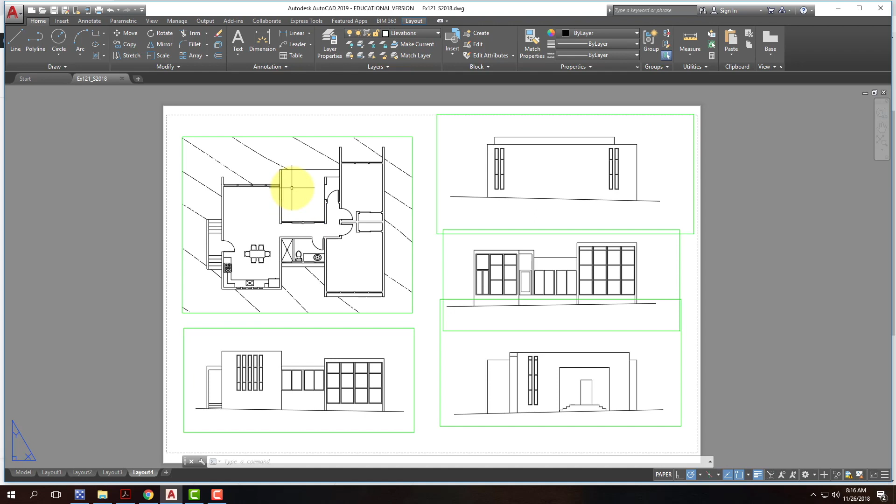And when I'm done with this, I'm going to go ahead and export it. I'm going to do that by going to the print icon, and I'll click on plot. We're going to continue to plot a single sheet. My guess is you already did this, but I'm just going back a few steps and reviewing here. The plotter should be DWG to PDF, which we set up originally when we did the layout. And so all I have to do is say OK. When that happens, I'm going to choose where to save it. And let me get into my flash drive here.

And let me create a folder for today. There we go. And let me call this... there we go. And I'll go ahead and click on Save. And when I'm done, that will open up in Acrobat so that I can see a quick preview of my drawing. OK, yeah, it showed up. That's good. We can go ahead and close that for now.

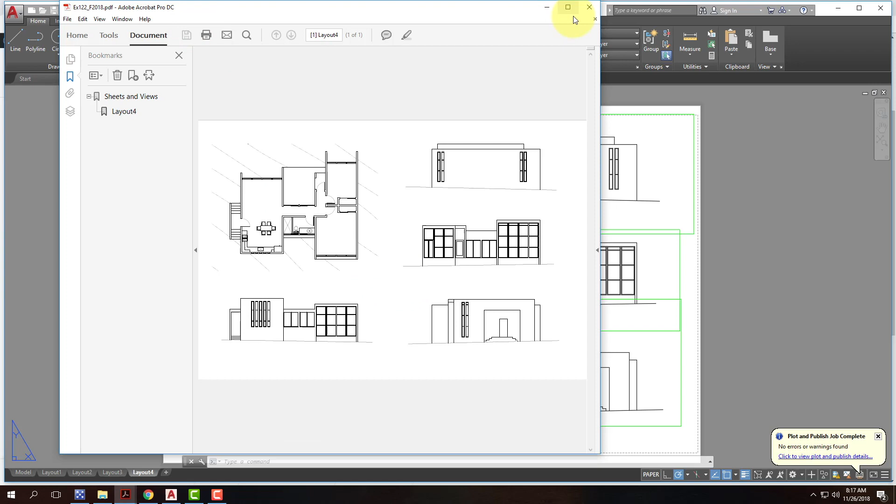And I'm going to minimize AutoCAD. I'll minimize Chrome here as well. And now that I have that created as a PDF, I'm going to go find it in my flash drive. So this was in exercise 122. And there it is. And instead of just double-clicking on it, which would open Acrobat, I'm going to right-click on this file. And I'm going to go to Open With.

And of course, these computers don't show Illustrator as one of the options. So I'm going to go ahead and say choose another app, more apps, and there's Adobe Illustrator. Why you would want to open this in Word, I have no idea. But we're going to pick Adobe Illustrator as our choice, and I'll go ahead and say OK.

And that's one of the neat things about a PDF file. It is an Adobe file, but Illustrator can read it natively. So we can just work, instead of on an Adobe Illustrator .ai file, we can work straight on the PDF. And the other thing about this is that AutoCAD, when it creates it, actually builds it as a bunch of live lines that we can actually select and work with. So it's not just a flat image file. It's something that we can really work with.

Let me press Control-0 so I can see the whole screen here. There it is. And we can see that most of my lines came through. Most of my line weights came through well. So I'm reasonably happy. Before I get too far into it, though, I do want to take some time and double-check line weights and make corrections as necessary.

So a couple things. When I first look at this Illustrator file, if I go to click on any one of the objects here, they're contained within the same invisible viewports that were set up in AutoCAD. That's not necessarily a bad thing. However, Illustrator likes to see the layers a little bit differently. So I'm going to come over here to my Layers tab. I'm going to expand Layer 1, and you're going to see that I have 5 clip groups showing. Each of these clip groups corresponds to one of the viewports.

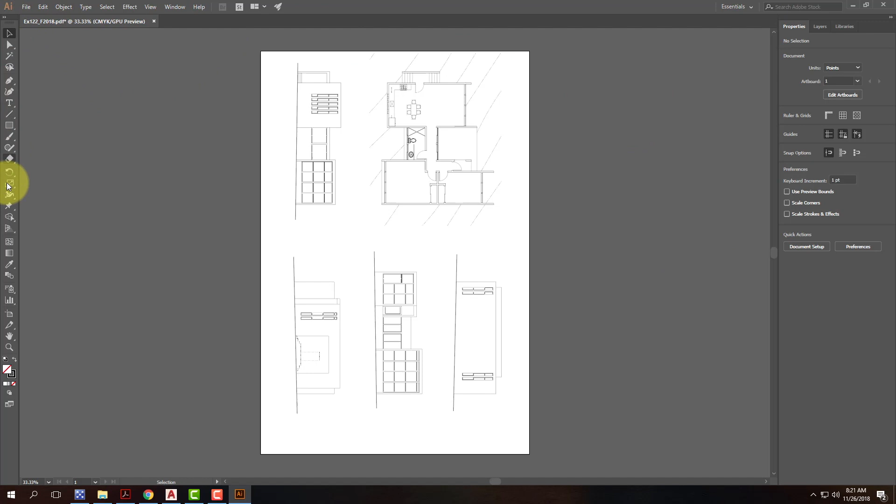OK, so for some of you, it came in like this. And so I just wanted to correct that in case it does come in like this. Mine didn't, but if it does, you're going to use something called the Artboard Tool. Come down on the left side here. It's almost to the bottom. It looks like a page with a little cursor in the upper left corner.

When I click on that, we see that I have Artboard 1 showing. When Artboard 1 is showing, if I go to the Properties tab over here, I can switch from my portrait into my landscape orientation. That's essentially switching the page size. Once I'm done with that, I can go to my black arrow and select all of my lines.

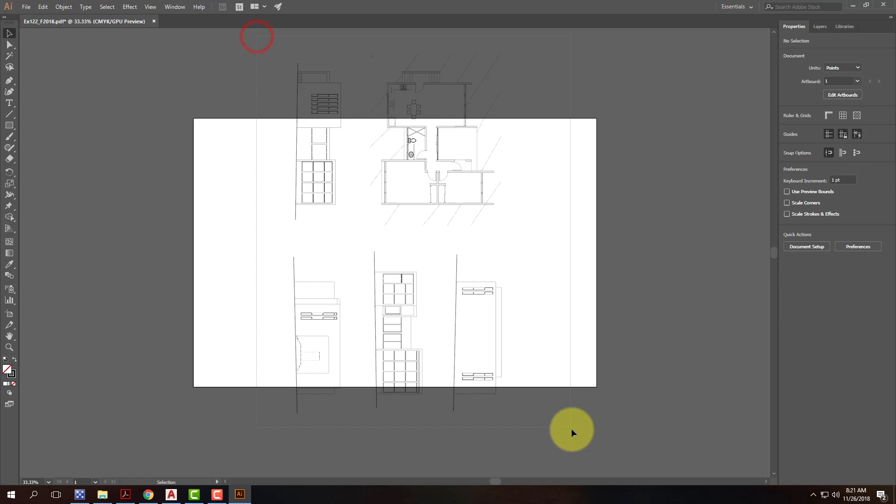I can do that by dragging a box around them or also pressing Control-A to select all. Then I'll move to one of the corners, and I'll get an arrow with an arc on it and two sides. That will allow me to rotate my drawings. If I hold down Shift while I rotate, it will jump to 90 degrees, and now I'm oriented in this direction. Hopefully it won't be an issue, but I wanted to at least bring that up just in case it

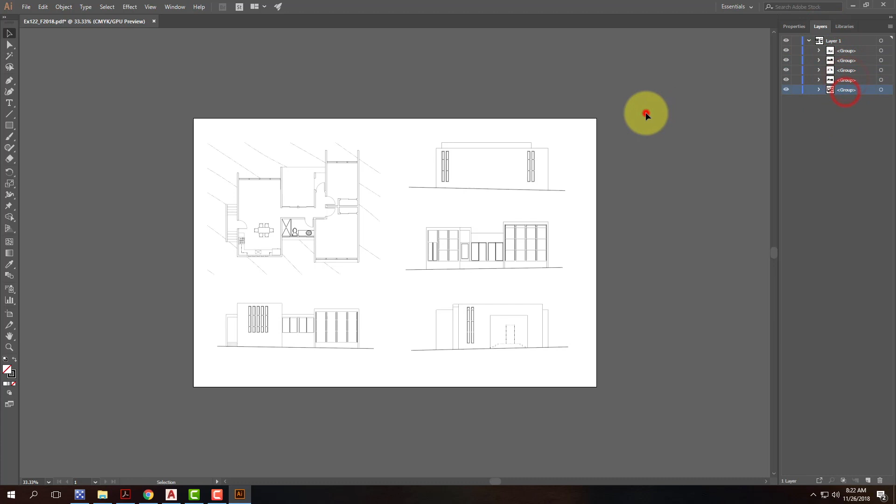presents itself for you. OK, so now that I have my orientation correct, I also have my layers correct so that they're in groups, I can start to really work with any one of these drawings. Let's look at the plan first. So I did Control+ to zoom in a little bit here. And if I wanted to edit something on the plan, for example, I could double-click to get into the group. And so this is called Group Isolation Mode.

And when I do that, I get this gray bar that appears at the top, which is getting me inside of the group, which doesn't allow me to work with the other objects. So I'm isolating just this one group. And I can then go in and make adjustments. So if I took this path, for example, and I went to Properties, and I said, you know what, I want that to be a little bit thicker, there it is at 2 point, and that looks a little bit better.

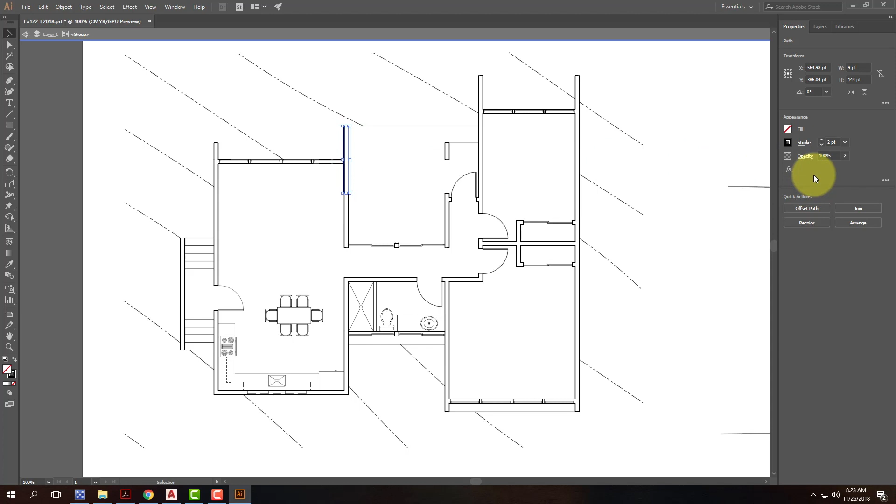In which case I might go back and select the rest of the lines, etc. It's a lot of work to go through and select them, which is why I would encourage you to do it in AutoCAD, not in Illustrator. But I like to point out that it is something that you can do if you feel the need to make that adjustment. So I'm just going to undo it for a second, like that. One more. Nope. There we go.

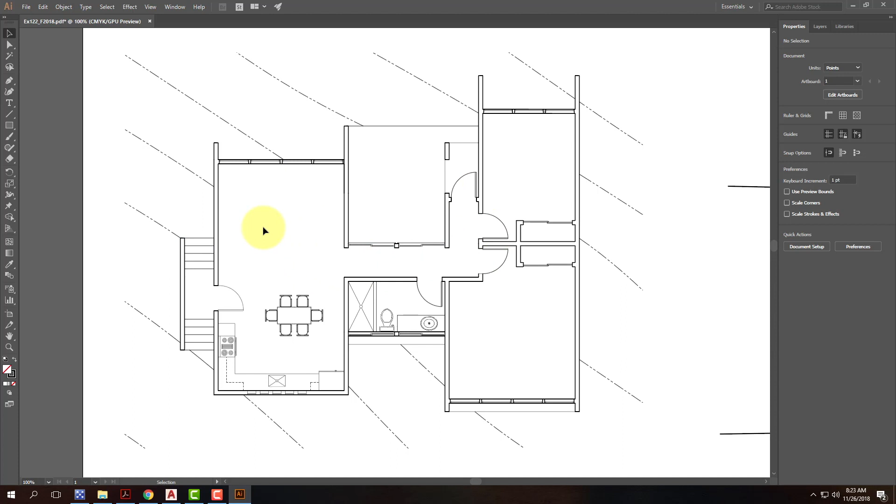But there are some times where you just need to make a couple little adjustments, and you can do that in Illustrator. Sometimes you might need to go into one of the elevations and thicken up that baseline. That might be a desired result. If that was the case, we could up the baseline a little bit. So there it is at 5 points, much thicker. Obviously, I'd want to make sure that each of these correspond.

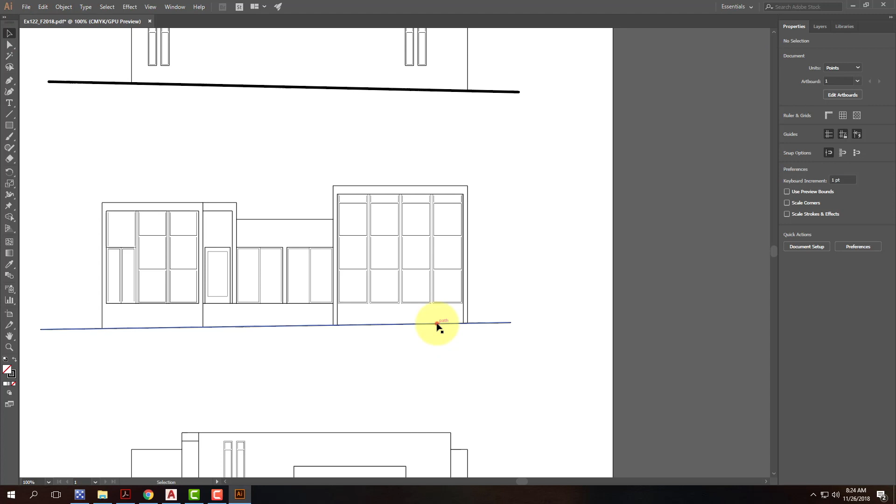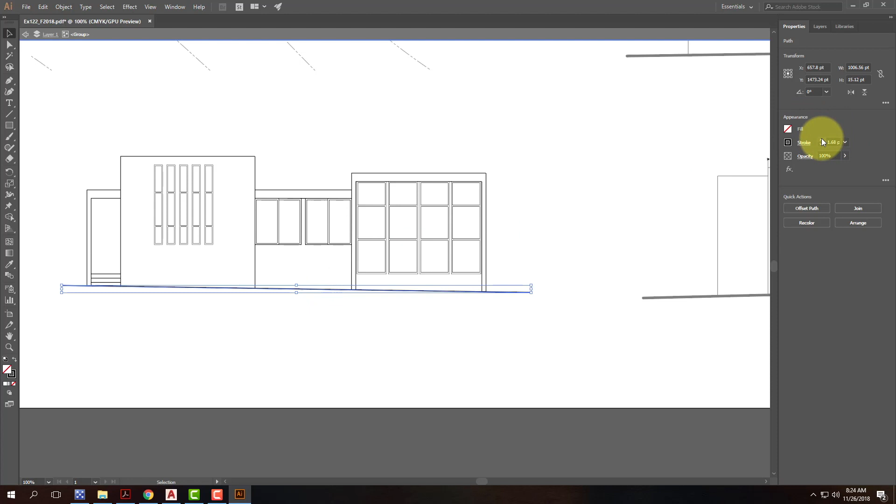To get out of the group isolation mode, I come up to this little back arrow and step my way back out, and then double-click to get in. This one was also at 5. I'll step my way out, come down to this one. Step my way out, and end with this one, and back out.

So that's the advantage of keeping them as groups, is that you can go into each in isolation mode and kind of focus on a particular piece. And maybe I decide that those lines are too bold now. It's just something that you can make adjustments to after the fact. I think it's easier to do it in AutoCAD, but at least you're aware that that can be done.

OK, so now I have this where I'm looking at it, and I'd like to further enhance the drawing. So we had worked in AutoCAD to do some hatching. It worked sometimes. Sometimes we wanted to fill in the walls of the plan, for example. We can do that in Illustrator as easily as we can do it in AutoCAD. It's just a little bit different in terms of the process. I showed you how to do it in AutoCAD. I want to show you how to do it in Illustrator as well.

So before I work on any of this, however, I always like to make a duplicate of the layers just in case I make a mistake. And so it's always a good idea to have that backup layer. And so here under Layer 1, with it selected, I'm going to go to the little flyout menu, and I'm going to say Duplicate Layer 1. And there it is. I have Layer 1 copy, and I have Layer 1.

You could call one of these Backup. I could say this is Backup, just in case. I'm going to put that down at the bottom of the layer stack, and I'll go ahead and turn it off because I don't need it.

Now that I have a backup, so I can go back to, I want to fill in some of this plan. So let me click on it, and I'll double click to get into my layer isolation mode so that I can work directly on this.

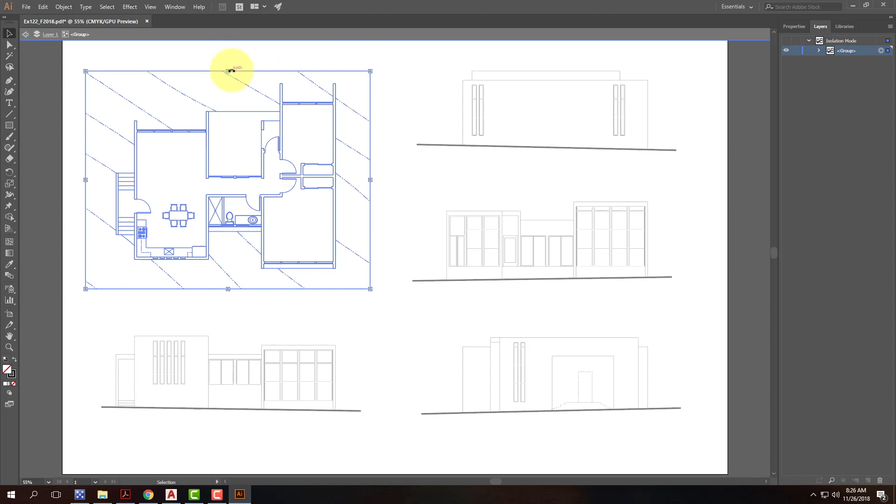And from there, I can use the Live Paint tool, which is available underneath the Shape Builder tool, or you can press K on the keyboard to get to it. It's called the Live Paint bucket. And this is going to allow me to fill in certain regions.

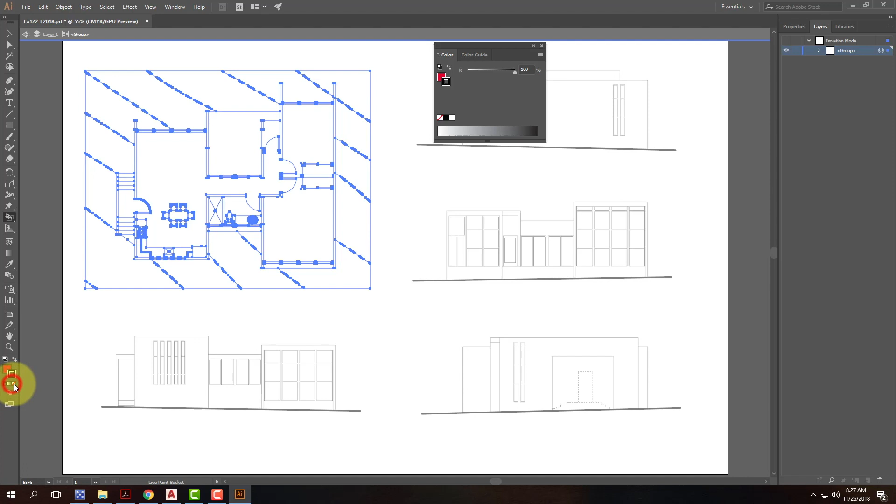So first thing I need to do is make sure that I have a color to fill in with. And I usually pick a bright color, something like a red. Yeah, or a blue or whatever. Doesn't matter what the color is, but this is going to help later on with the selection process.

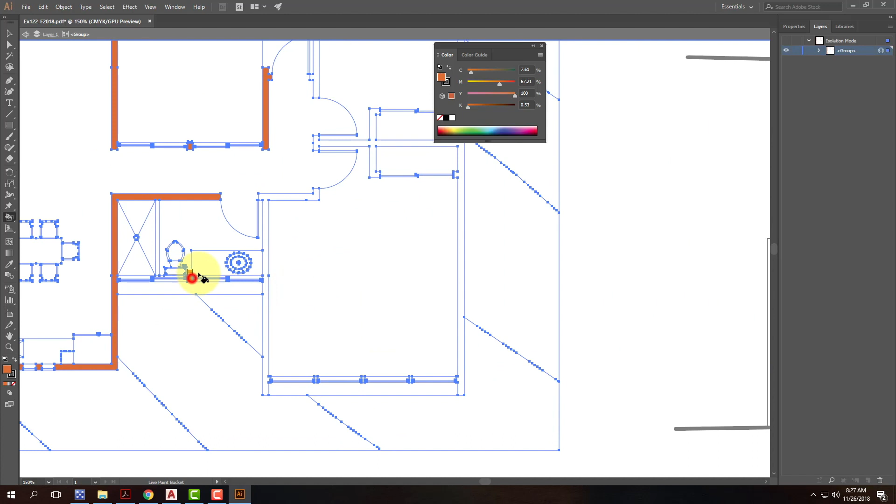So let me zoom in just a little bit, and I'm going to fill in every one of the walls with this color. So this is kind of like doing a hatch in AutoCAD, where we're going through and we're making little selections. And now I've selected all of those.

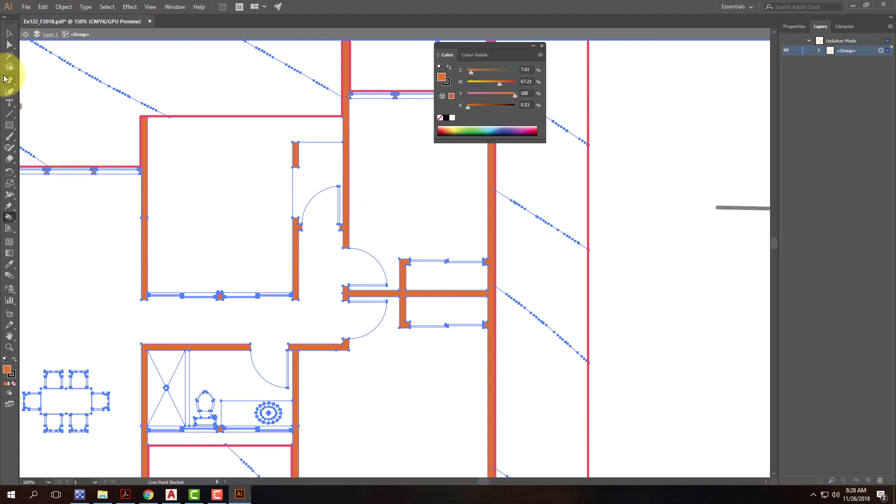Now it's entirely possible I might want to work with the floors as well. If that's the case, I'll change my color to something else, and I can fill in where the floors would be. Like that. That works. And I'm not going to worry about any of the other fill regions for right now. So I filled those in.

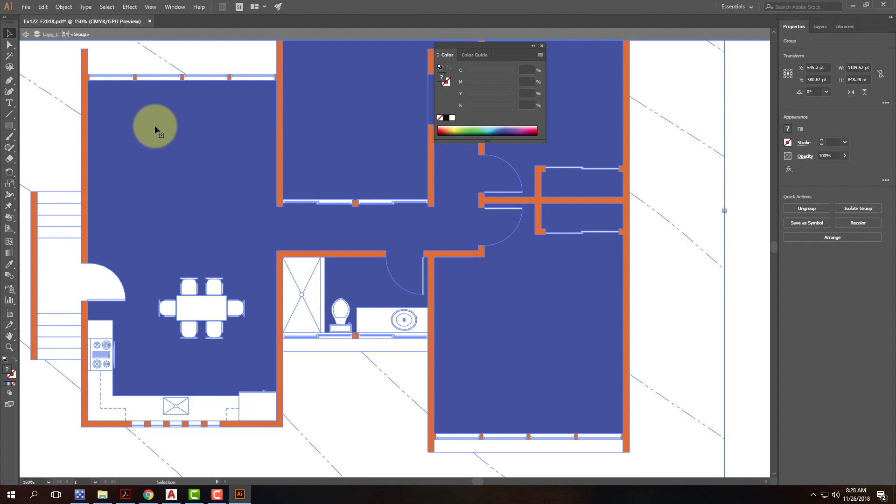When I'm done, I'm going to come over here to the properties, and I'm going to come down and choose, where'd it go? OK, well, I'm not going to worry about that for right now. Let me go ahead and back out. I'm going to use my direct select arrow right here to select just one of the colors. So we'll pick this object here, I hope. Let me back all the way out for just a second.

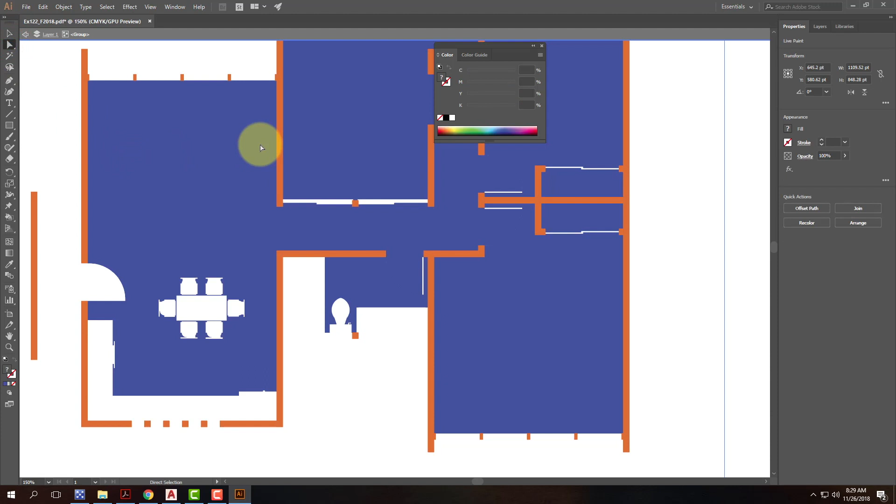All right, I have to expand the live paint group, but somehow it's not letting me expand the group. Hold on a second. OK, so there used to be a button that says expand. It's not there. So with my live paint group selected, which it still is, I'm going to go up to the Object menu. I'm going to go to Live Paint, and then I'm going to click Expand. I wish the button was still there. I don't know what happened to it.

Once I've done that, I can use the direct selection tool, the white arrow, to select any one of these filled in regions. So let me select the orange filled in region for my walls. And I'm going to select this one, but I want all of them selected. So using the Select menu, I can go up to Select and then Same Fill Color, which is going to select all of the orange.

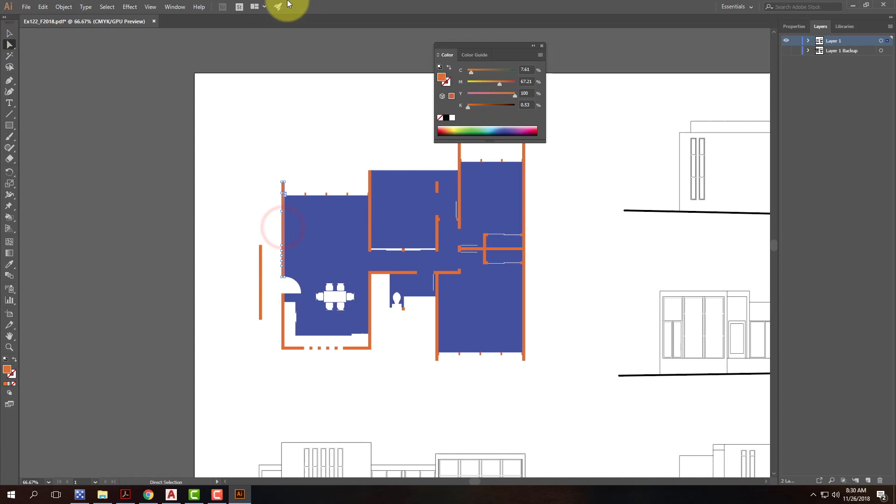I'm going to go to my layers, and I'm going to create a new layer, I hope. Let me back out of my groups for just a second. There we go. Let me select Same Fill Color. There it is. I'm going to create a new layer. I'm going to call this new layer walls. And I'm going to move all of these objects onto the walls layer.

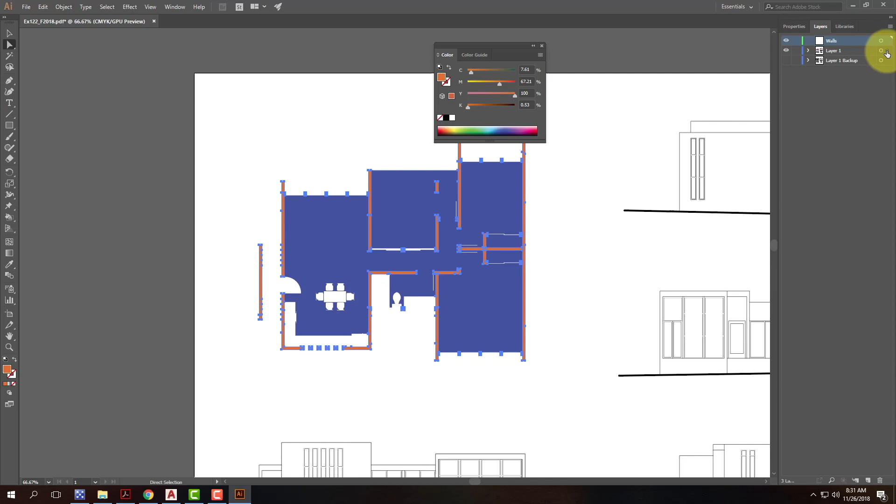So they're selected. To move the objects from one layer to another, I'm going to select this little box next to where it is in layer 1. And I'm going to drag that up onto the walls layer. And it's going to change all of the walls onto the walls layer. And then I'll go ahead and turn it off.

Next thing, I'll do the same thing with the blue floors. I'll select the floor. I'll go to Select, Same, and we're going to do Fill Color to get all of them. I'll create a new layer, and we'll call this floors. And I'll move these objects onto the floors layer. So I'll click and drag those up onto the floors layer. So now I have the walls and I have the floors each on a separate layer.

With them like that, I can go ahead and change, for example, the color of those. So with just those being highlighted, I could select them all. And I could come in here and I could say, you know what, I want them to be a certain percentage gray. So maybe I'd say I want them to be 30% gray. So it would be 0, 0, 0, and 30.

Gives me a nice light gray color. I can then turn on my layer backup, which is my original undisturbed. Let me move it on top of everything else. And we can see that I was able to change the fill color of those walls.

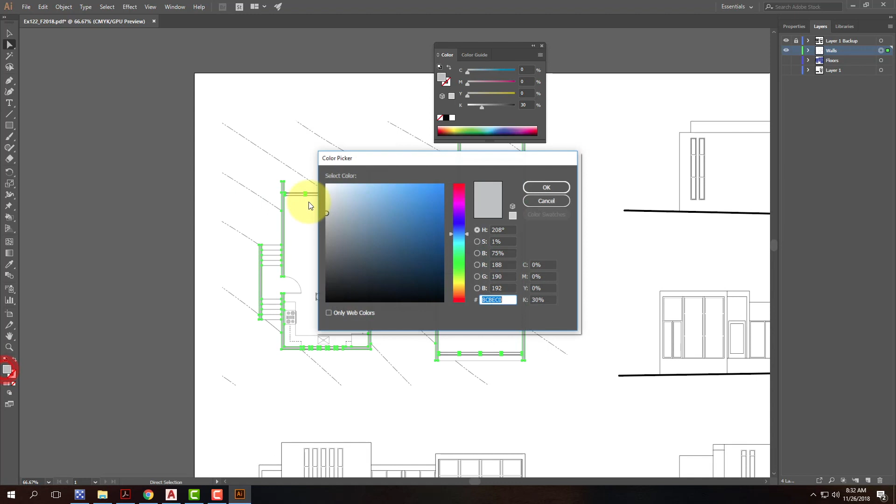If I didn't like them, we could come back and I could select those walls again. And I could say, you know what, I wanted them to be a little bit darker. So let's change that to 50% gray. And now those are just a little bit darker. So it's pretty easy to make those adjustments.

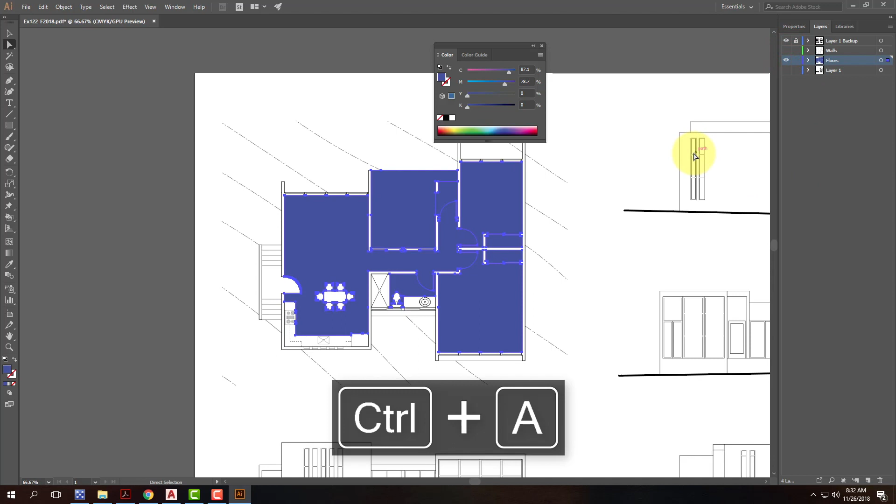The floors, if I were to turn the floors back on, I can do something similar, where I could take the floors and say select. Let me just turn off the walls. I'll select all the floors. And I could change them to be a much lighter gray. So maybe a 10% gray.

I could say 0, 0, 0, 10%. And they have just a little bit of gray to them. And maybe that helps distinguish what are floors and what are walls versus my line drawing. So it's subtle, but it helps the floor plan pop out just a little bit from its surrounding context. Sometimes you want a little bit more texture to these so that they're not quite so stark.

Computer graphics are always very sharp. Maybe you want to make it a little bit dirtier. I have a couple different options for you, one of which is available on the course website. If you go to your Resources tab, come down to Swatches, I have some sets based on Prismacolor markers. For those of you that have worked with inking markers and that sort of thing, these are designed to mimic what it would be like if you colored it in by hand.

If you download the architectural set, for example, this will match up with the architectural set of Prismacolor markers. The colors should be the same. We're not doing color matching on our printing, so it's not perfect, but they're pretty close. Once you've downloaded that, you'll want to expand it and save it on your flash drive. It's taking a little while to download. I already have it expanded on my flash drive, so I can go back over into Illustrator.

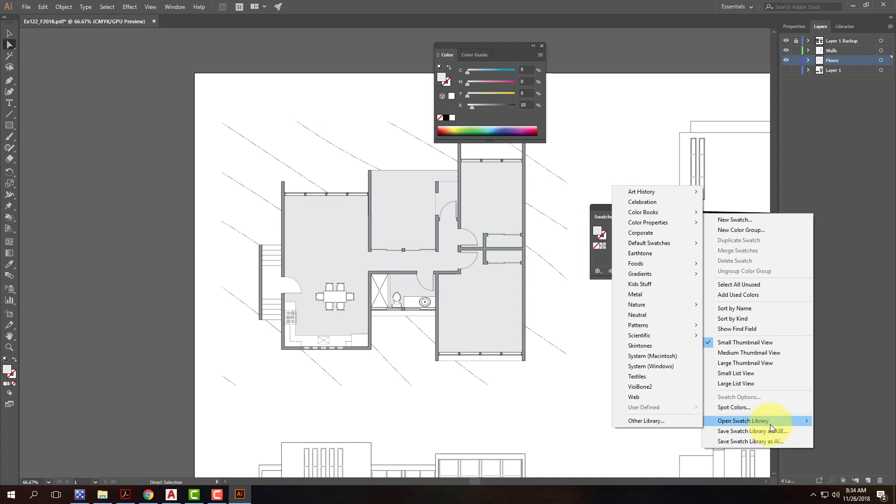And I'm going to open up the Swatches window. So I'm going to go to Window and then open Swatches right there. And with the Swatches window open, I'm going to click on the flyout menu, the 4 lines in the upper right corner, and say Open Swatch Library, Other Library. And I'll go find that architectural swatch library on my flash drive.

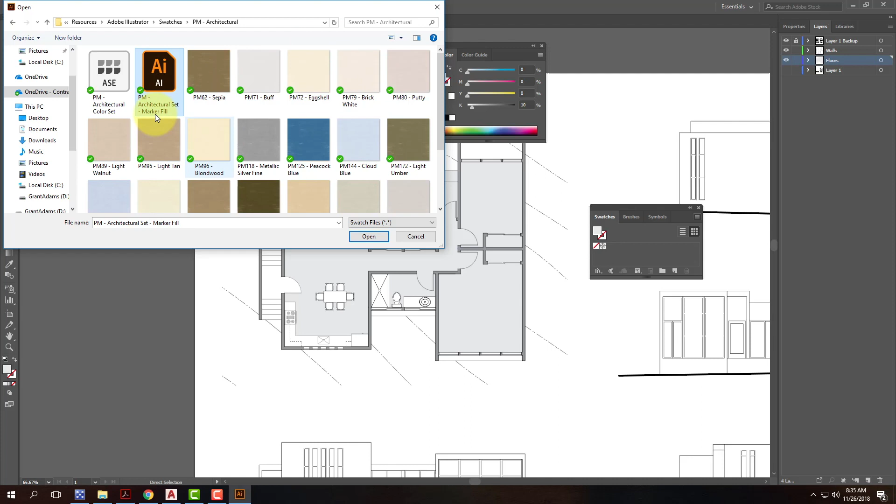So I have a folder for Resources, a folder for Adobe Illustrator, a folder for Swatches, and there's my Prismacolor architectural, and there's the architectural fills. The AI file here that I'm going to load, and I don't know if you guys can see this. Yeah, you can see a little bit on here. They have some streaks in them, as if you actually colored with the markers. So it's a little bit more casual than just the color itself. So I'm going to go ahead and open that.

And there they are. That's the architectural set of markers, or what Prismacolor deems the architectural set. And essentially what I can do then is I could select all of these objects. So let me go into Select, Same, Fill Color. And I could say, you know what, I want to apply one of the architectural swatches. Maybe something like that. It's the color, and it's also a little bit of a marker texture.

On the projector, you're not going to be able to see the marker texture as well as on your own individual screen. Sometimes if I pick one of the darker ones, you can see it a little bit better. I can see it on my screen. I wonder if you can see it there. No. I don't think you're going to be able to see it. Even if it was the black one, I don't think you can see it. So you'll have to try it out for yourself. And so you can play around with what the various color options are.

If you don't like the architectural marker set, there are a few others that you could download. Some of the sets that I really like are the warm grays or the French grays, which are just grays but with marker streak pattern to them. And so the same thing applies. I would go into my swatches, click the flyout menu, and I'd go into Open Swatch Library, Other Library.

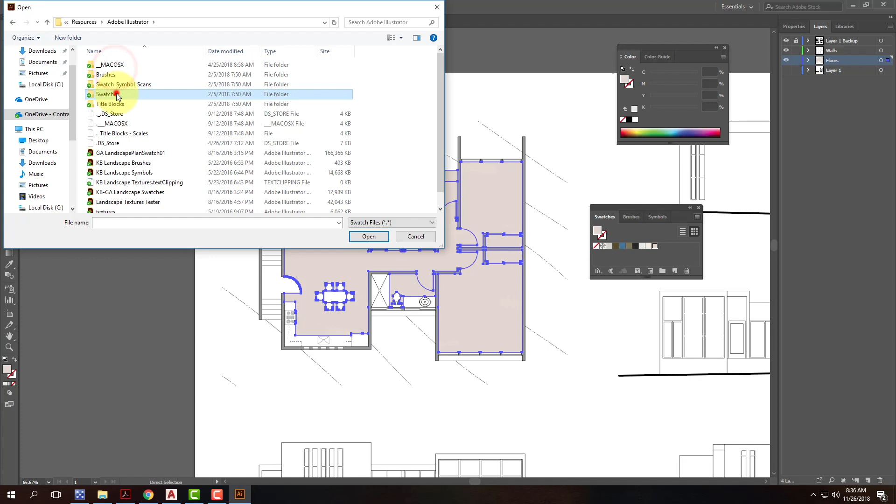And once again, I go into my Resources folder and into Swatches, and I could go to the warm grays. And there you go, there's the warm grays. I'll pull those out separately. Going from 10% all the way up, I think that's a 50% gray. You can get darker, etc., depending. So somewhere in here, yeah, probably like that. That's a warm gray, 20%, 30%.

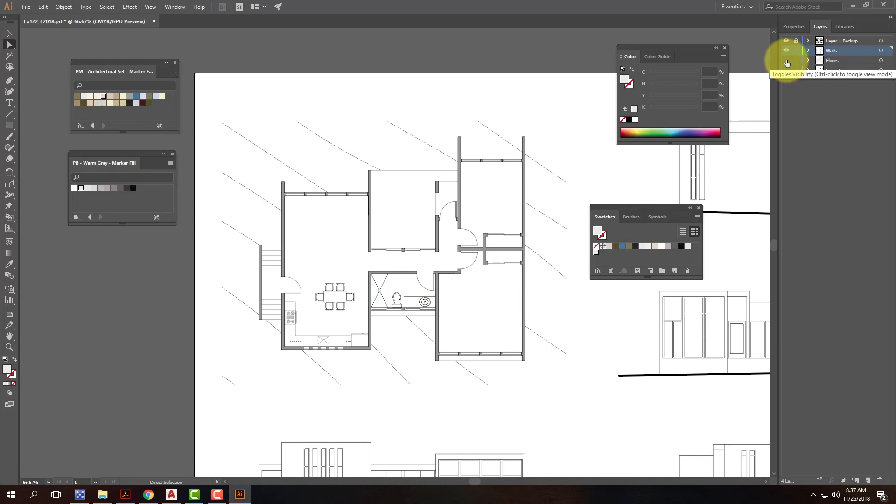Looks pretty good. I can do the same thing with my walls. I could use that same swatch pattern for the walls. So let me go into my walls layer. And with that selected, there they all are. I could come back in and pick a slightly darker for my walls, maybe a 50% gray, maybe 60%, something like that. And that would fill in those walls. And then we can turn back on the floors.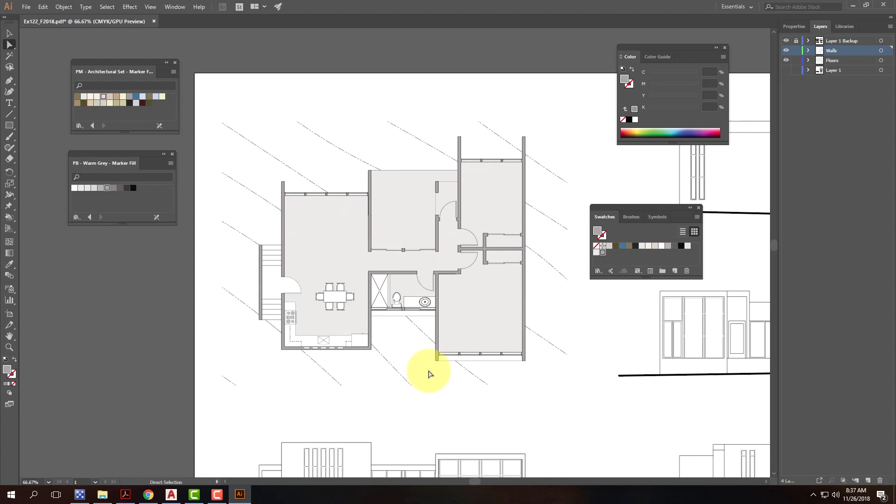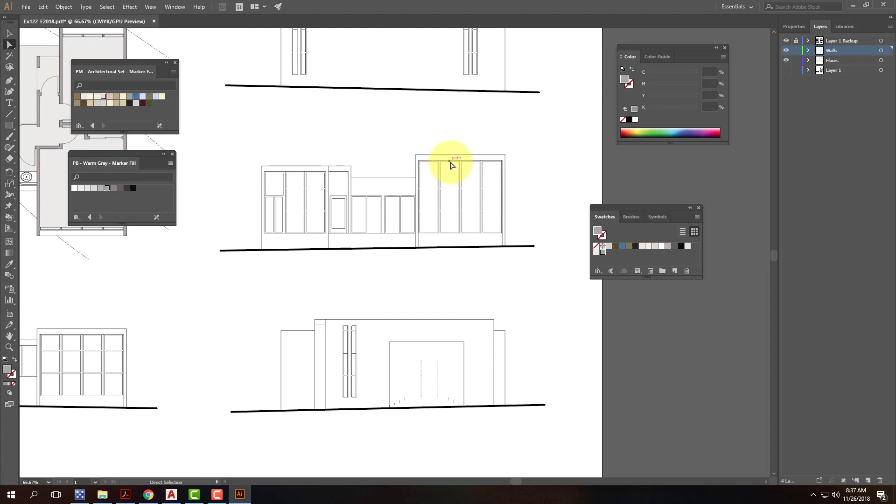So essentially what I'm doing is I'm doing a little bit of collage work after the fact in Illustrator to enhance my plan a bit. And in this case, I think it did a fairly successful job. Somehow I missed that region in my fill, but it's OK. So the next thing that we can do is I could identify what are windows on this particular elevation view, because I think that would help enhance this just a little bit. So I could do the same thing.

I'm going to turn off my layer backup. I'll turn off my walls. I'm going to turn on my original layer right here. And I'll get into this. There we go, this group. I'll double click to get inside, and I'm going to select it all. I'll go back up to Object, Live Paint, Make. I'm just going to make it that Live Paint group. Sorry, let me make these marker sets a little bit smaller there.

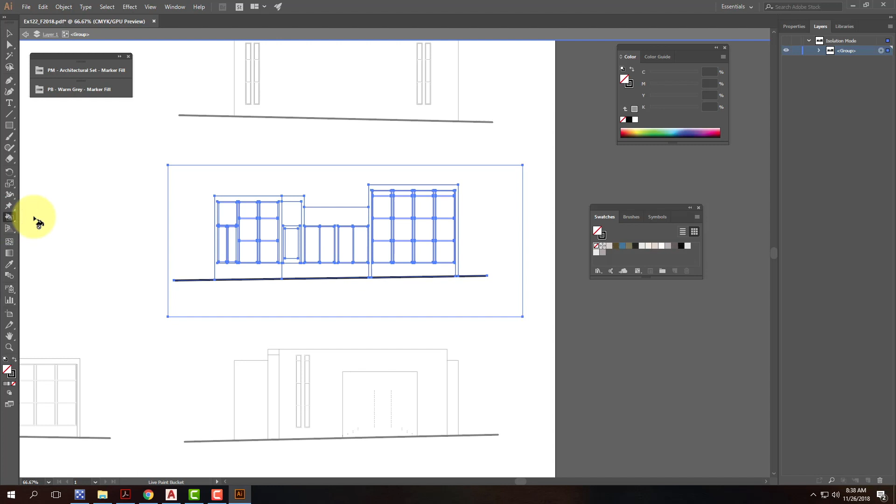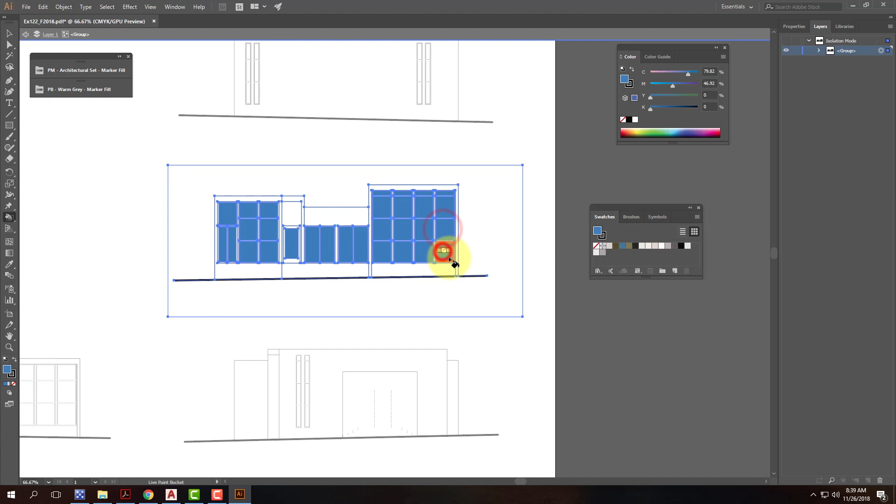Then I'll go to my Live Paint tool, which is right there. I could press K to get to it. And I'm going to go ahead and change my color. So let's make it kind of a blue color. And I'm going to fill in each of the places where there is some glass. OK, so now I have all of those filled in.

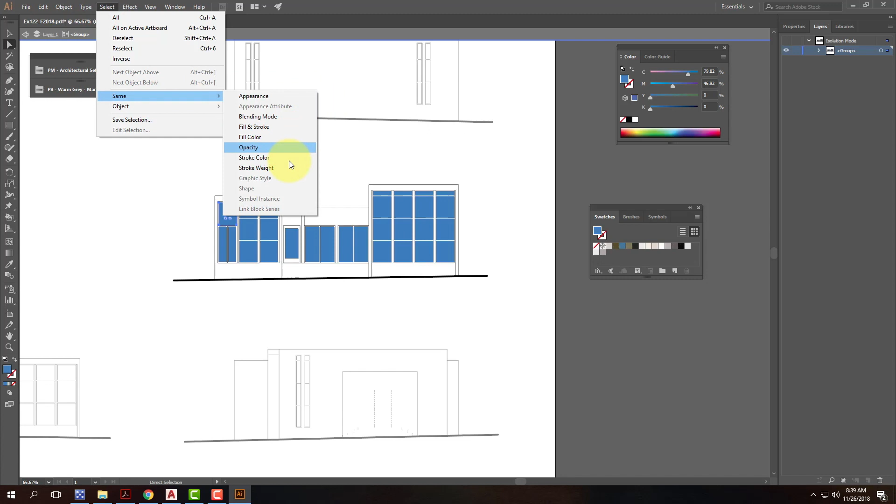When I'm done, I'll go up to Object, Live Paint, Expand. That breaks apart the Live Paint group and will also allow me to use the Direct Select tool, the white arrow, to select one of the glass panes. Then I can go up to Select, Same Fill Color to get all of them. And I need to get out of isolation mode, back out. There we go. One more time, let me select the first one. I'll go to Select, Same Fill Color.

I'll create a new layer, and we'll call this Windows. I'm going to call it Windows 1, because I may do it in multiple locations. And then I'll go ahead and put all of these objects on that Windows layer. So I'll click and drag the little square up onto the Windows 1 layer, and then we can turn off everything but the windows. So in this case, I could turn back on the line drawing, and all of my windows are at least shaded in blue.

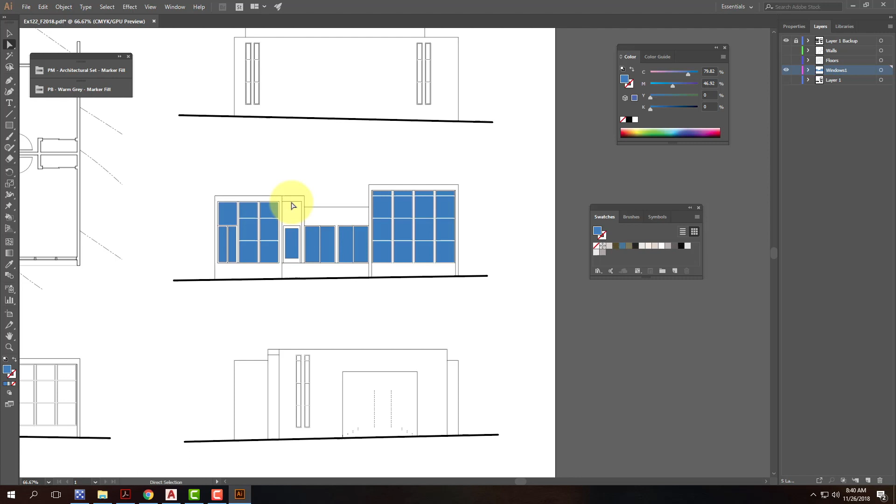Maybe that blue isn't quite the right blue. I could select one of them and go back to Select, Same Fill Color. And I could adjust the color of blue so that it's a much lighter shade of blue. Maybe like that. And maybe that looks a little bit better in terms of designating that as a set of windows. Sometimes, however, using some kind of a texture on the background makes it a little bit more realistic or easier to see. And in that context, I'm going to go find an image of some clouds.

I already have a cloudy sky. I've downloaded them. I've saved them on my flash drive, so I'm not going to download one of these specifically, but you could download any one of these and make it work. And so now I need to bring in that cloudy sky. So let me go ahead and go to File and then Place. And I'm going to find a cloudy sky.

It would be under Resources. It would be under Collage. It would be under Skies, Cloudy Skies, and there we go. And maybe this one. I'll go ahead and place it and drop it right there.

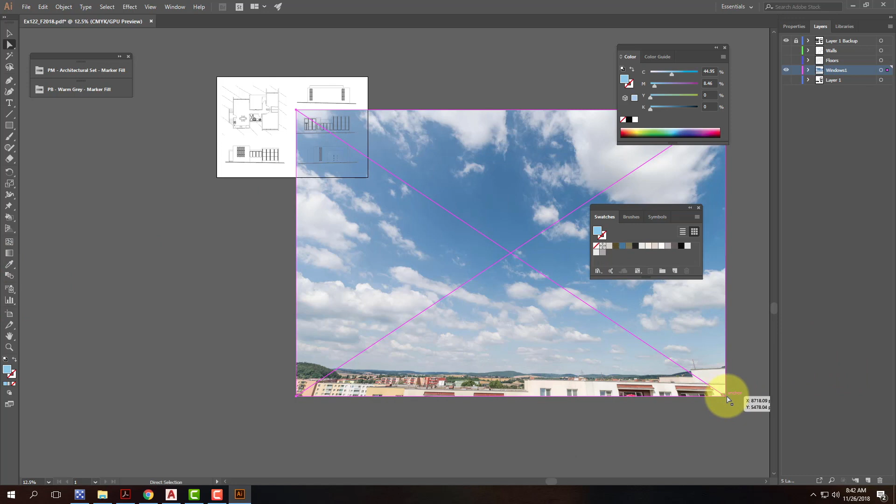It's way too big. Let's make that a little bit smaller. I'm going to hold down Shift. Let me use the regular black arrow here. Hold down Shift. Make that a little bit smaller. Something like that. Let me zoom in here.

OK, so now what I want to have happen is for all of the little shapes that were representative of my windows, I want for all of those to cut out this image. And this is something that used to be, I would say, the most important thing that I would teach during the semester. And tides have changed a little bit. Strategies have changed a little bit. Now we do a lot more Photoshop masking, which is what I emphasize.

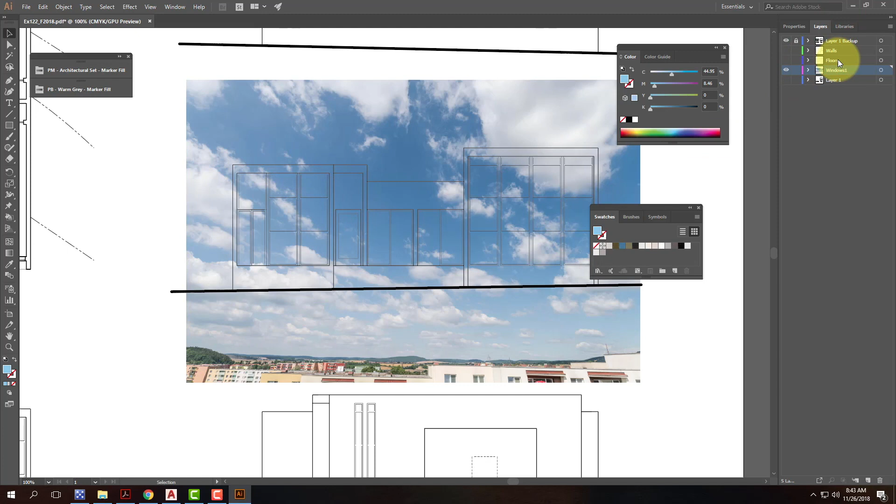OK, so let me look specifically. Let me turn off my background altogether. Let me look specifically just at this Windows 1 layer. So on this Windows 1 layer, I have the image, and I have all of the little squares that are in the background. Let me turn off the image for just a second, and let me look at all of these. So I have all of these together. They're in a group right now, but I want them all to become one object, not a bunch of individual little objects.

And I can do that by going up to the Object menu, and I can go to Compound Path. If I can find it, there it is, Make. And that will change all of these from individual little objects into one object. And there it is listed as a compound path instead of a group. That's good. I'm going to make sure that the compound path is on top of my image file. So the compound path is on top of the image file.

This, by the way, has to be in this order for it to work. And this is one of the stickier things in Illustrator, is it's very, very specific. You can't have more than one path. It has to be just one path, and it has to be a compound path if you have something that's complex like this. Once you have that, it has to be on top of the linked image file.

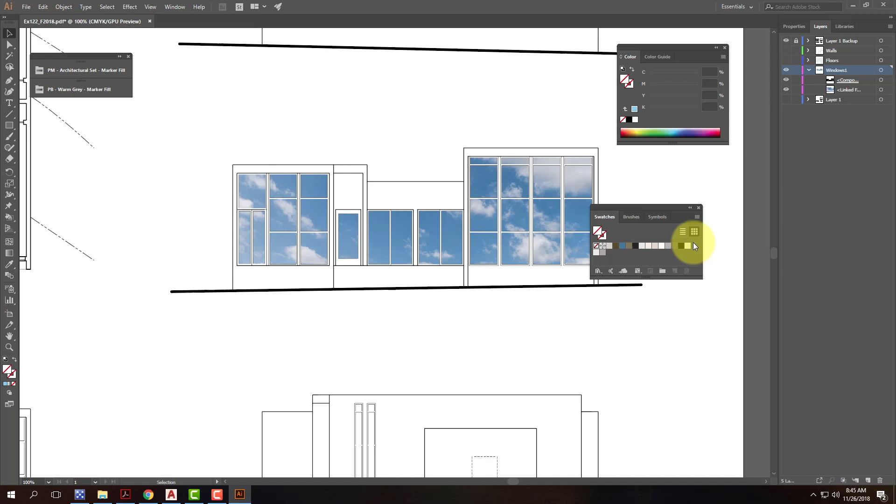Once this is the case, I'm going to select the main layer itself, the Windows 1 layer, and I'm going to come up to the flyout menu, and I'm going to say Make Clipping Mask. And when I do that, it's going to clip the image in the shape that I had selected there. So it's essentially clipped the image to show just the sky with the windows. At that point, I could turn back on my layer backup, and we'd see that the glass is represented by the sky, not by just the colored region, which can be a very successful way of representing the sky.

Sometimes this needs to be adjusted a little bit. Sometimes it's a little too dark. If I select it, go into Properties, I can change my opacity right here. We could drop it down so that it wasn't quite so dark. It's amazing the difference in seeing it on the screen projector versus on my screen. This is too light, but on the screen projector it looks reasonable. So it is what it is.

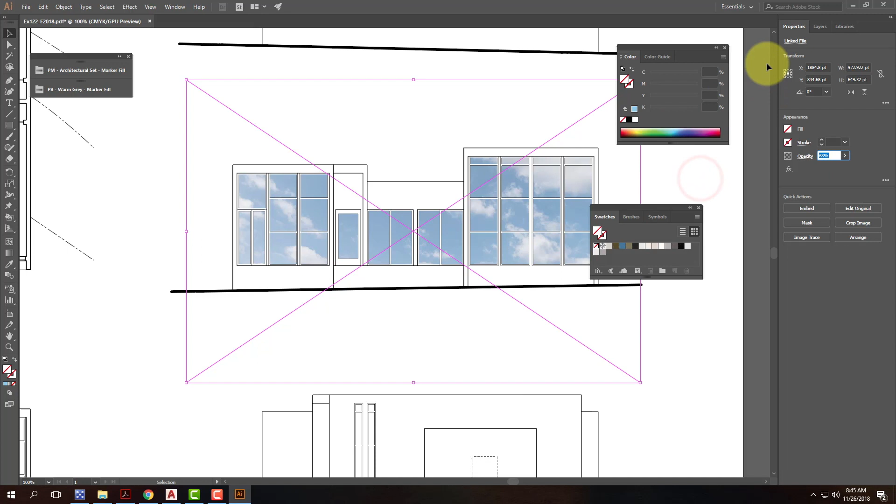So that's how to create these windows in your line drawing. I could do the same thing with a wall texture. I could do concrete as a wall texture, and I've done that in the past. I'll show you really quick here. I have an old version. Not that one, sorry. Apparently not that one either.

There you go, there's one where I did a concrete texture on the background. Frequently, if you do concrete texture and windows, it becomes a little bit too dark. They're a little bit too stark. So I'm not going to do the concrete texture this year. I'm going to stick with just the windows, but I am going to do the windows on the other drawings so that you can see me do it multiple times.

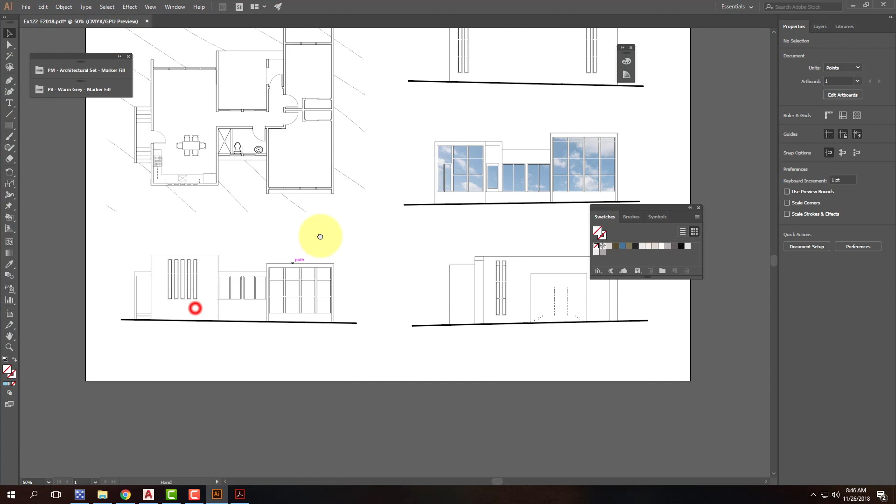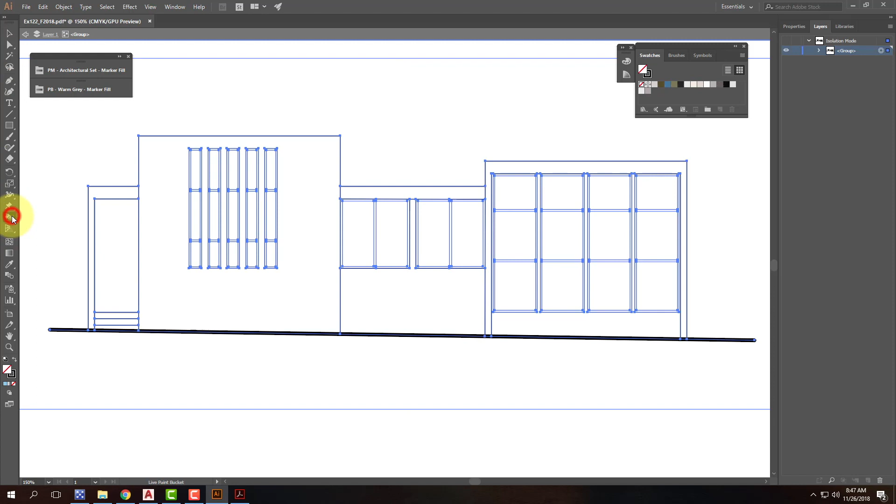So let me come back to my Illustrator file. I want to do the windows on this particular file down here. There's my elevation. I'm going to get into this group. Hold on a second here. Wrong layer. There we go. Get into this group. There it is. Let me select them. I'll go to Object, Live Paint, and then Make. Then I'll go to my Live Paint tool, and I'm going to fill in with blue where all of these windows are.

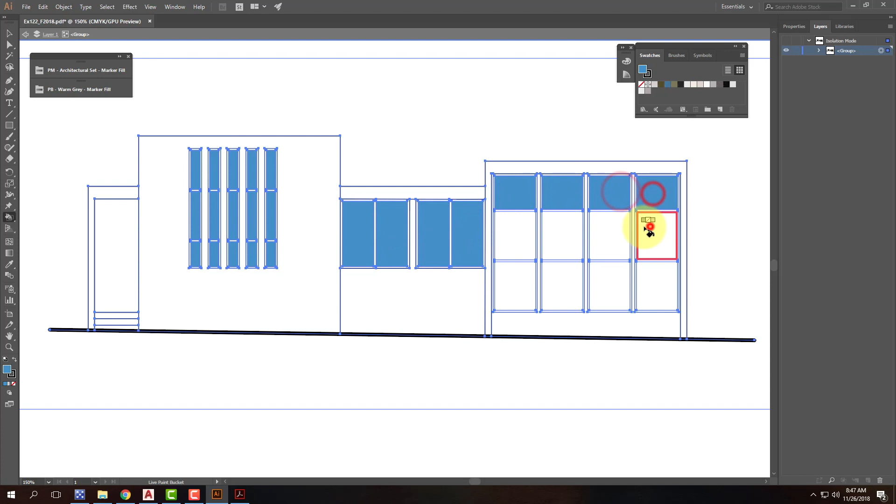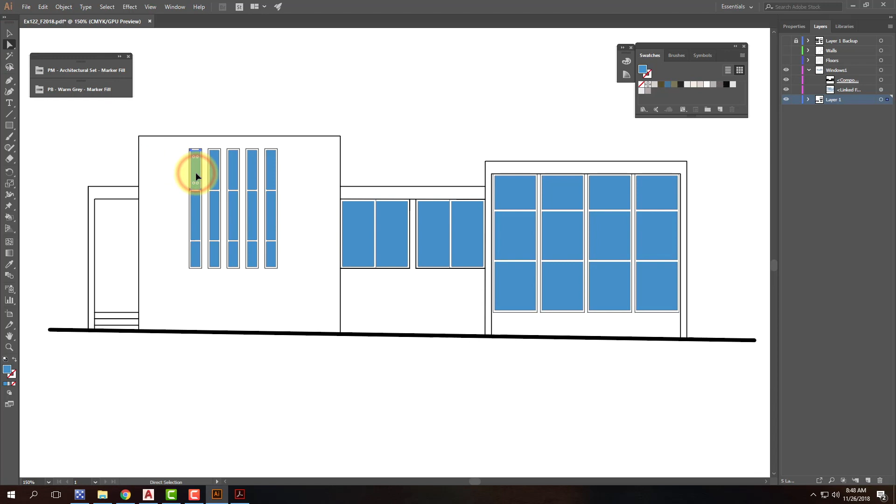There they are. Once I have all of those in, I'll go up to Object, Live Paint, Expand. I'm going to back out of my group isolation. I'll use my white arrow or my direct select tool to select one of them. I'll go up to the Select menu and say Select Same Fill Color. So I have all of them selected. And now I need to create a new layer. And we'll call this Windows 2.

There's Windows 2. And I'm going to move all of those objects onto the Windows 2 layer. I'll grab the little square, drag it up to the Windows 2 layer. So now I have the Windows 2 showing. They're all individual objects. But if I select them and go up to Object, Compound Path, Make, it will make them all one. Let me put that fill color back in so you can see it. There it is. They're now all one big object because the paths have been joined together.

Once that's the case, I can bring in my image file. I'll go to File and then Place. And I'll drop in the sky. I think it was this sky. I don't remember which one I put in. We'll drop it in here, zoom out a bit. And somehow it didn't like that particular file. Let me get rid of that and try it again. I'm going to go to File and then Place. Let me try a different one. There we go. Zoom out. Make this a little bit smaller. I'm going to hold down Shift to keep it in proportion.

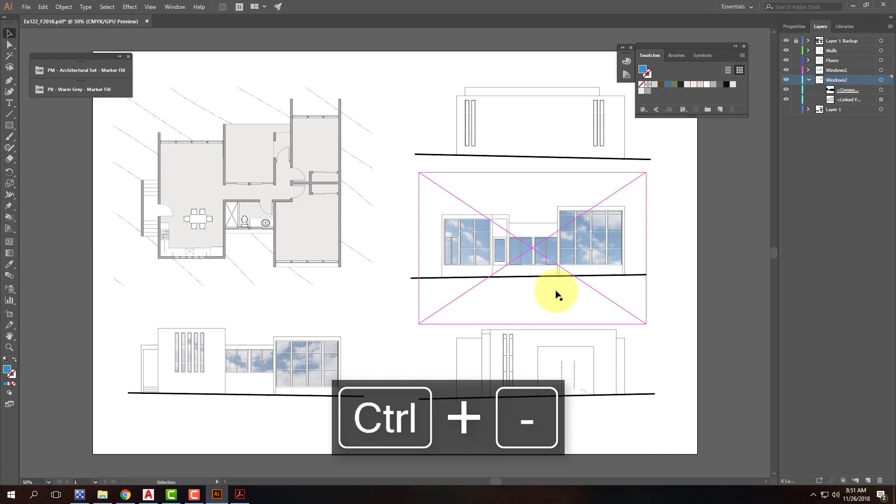And so now essentially what I have is I have my elevations, but I've emphasized a few things on the elevations. I don't need to do a full-scale collage where everything is filled in. I don't need to fill in all the walls. I don't have to put in concrete. I'm just trying to identify a few things or distinguish a few things. That's what collage work is good at doing. You don't need to overdo it. That's an important thing that people tend to forget. So I've done a little bit, and I think that's good.

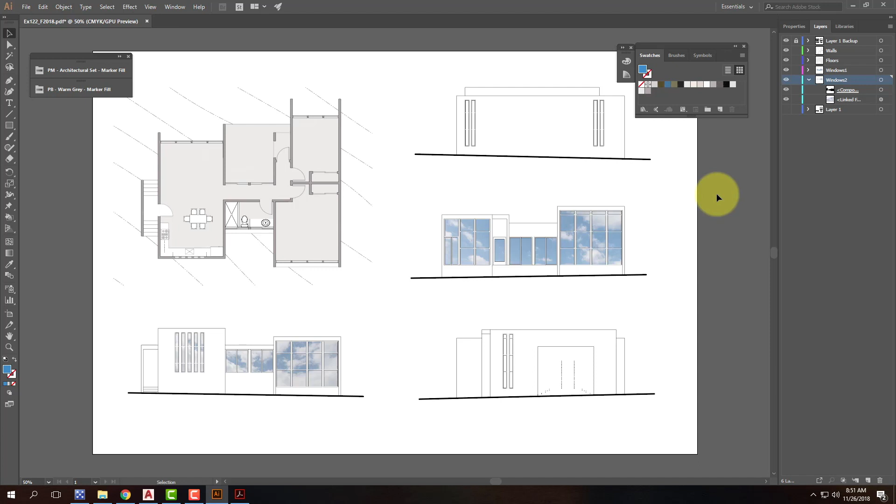The next piece that I really need is some text or some identifying marks on this particular page. And so when you go to add text, the single biggest thing that people make mistakes on, and the one thing that I will definitely grade you down on, I would go as far as grading you down at least a letter grade for doing it, is people love to say, oh, I need text. Okay, this is my north elevation. Let me add some text here.

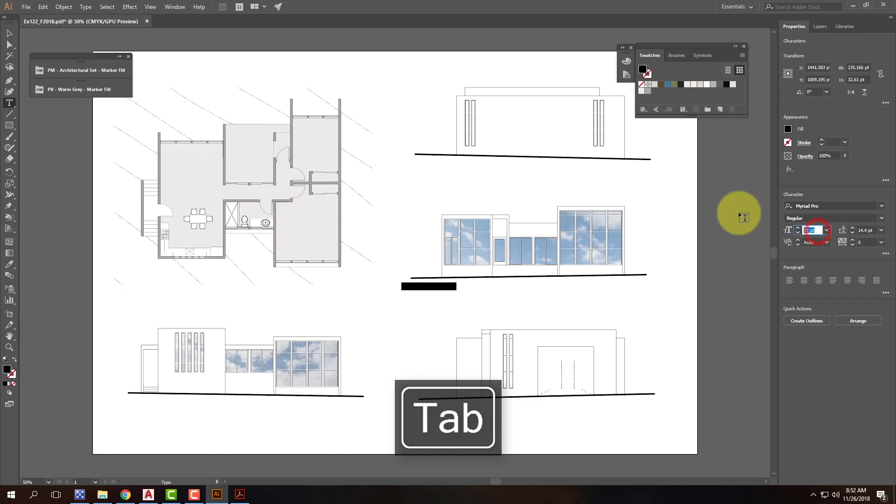Oh, wait, I can't see that. Oh, well, let me come up into my properties and let's change the font. Oh, I don't know. Let's make it 30 point. No, let's make it bigger than that. Let's make it 72 point. Awesome. Oh, you still can't see it. Sorry. I was on the wrong layer when I created it. And now I managed to just freeze Illustrator. Oh, how nice.

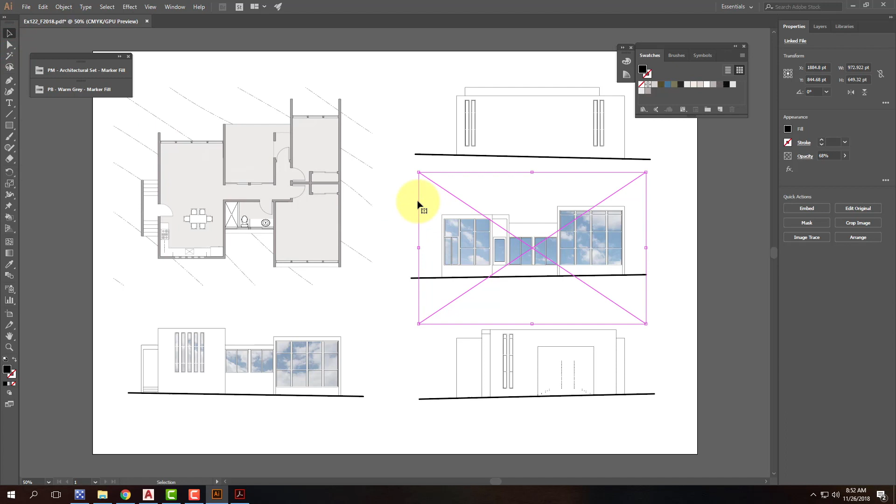Oh, come on. So how convenient. I think there we go. I'm back. All right, good.

Let me put that text on its own layer. Should have done that from the beginning. I'll make a layer called text, and I'm going to put it on top of everything else. And I'm going to take my north elevation text, and I'm going to move it up onto that text. There we go. And so now I see it. And so this is something that people do. They say, oh, I need text. Let me put text on. That looks pretty good on a computer screen, right?

Yeah, okay, maybe. When you print this out, north elevation is going to be like this big when it's 24 by 36 at this point font. The problem here is that when I go to look at it, the only thing I'm going to see when I look at your printed out version is this giant text that says north elevation. It doesn't work. It always distracts somebody from looking at it. You don't need text that big.

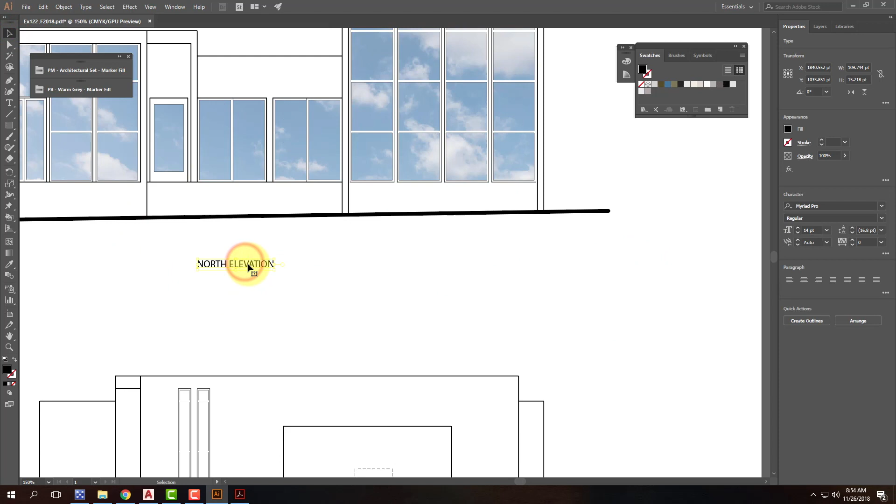And it's the biggest mistake young designers make, is they do this and they make their fonts way too big. So they don't need to be this big. It's not a style thing. Just don't do it. Okay? So instead, when we're talking about adding a little bit of text, we're talking about taking this north elevation text and making it no more than 18 point, but realistically somewhere in the neighborhood of 12 to 14. That's about the right size. It's a lot different. So I could say this is a north elevation.

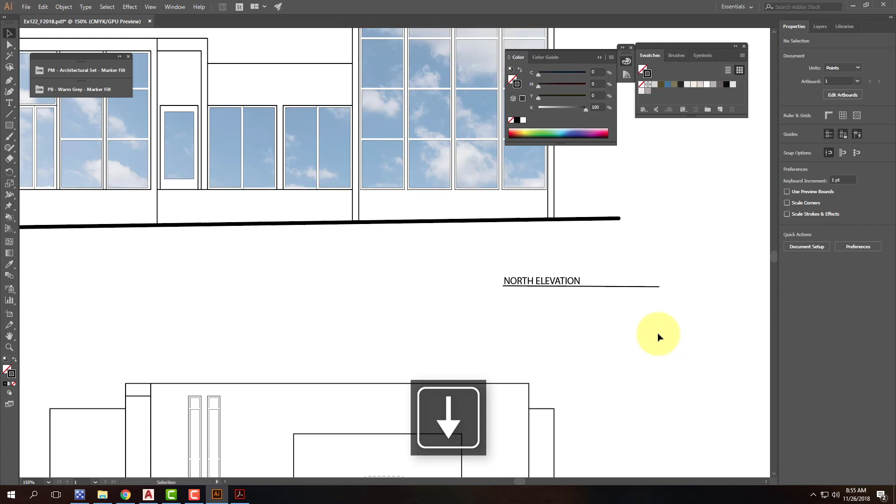Now maybe I want to add a little bit more underneath it. Maybe I want a line that goes underneath it. And maybe I want to do something like that just to give it a little bit more character. Maybe, you know what, I'm going to lock all the rest of these layers so that I don't keep accidentally selecting them. Okay, maybe I'll move it over a little bit. Maybe I'll extend this out just a little bit.

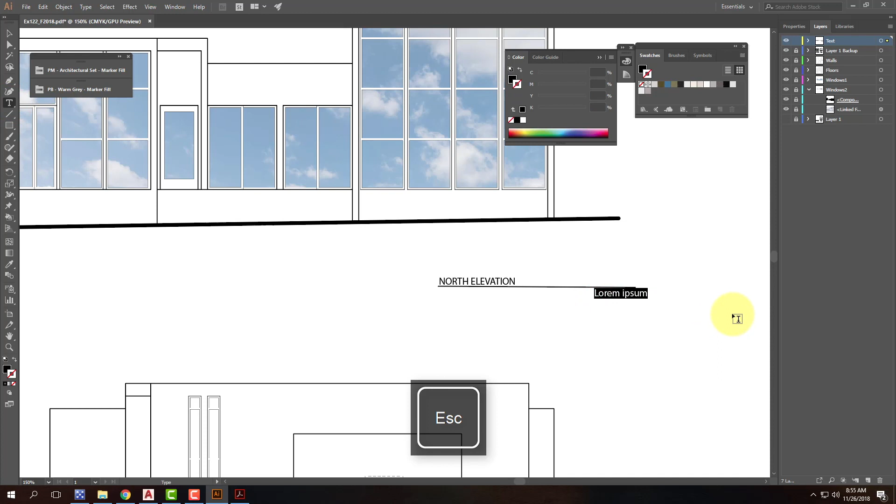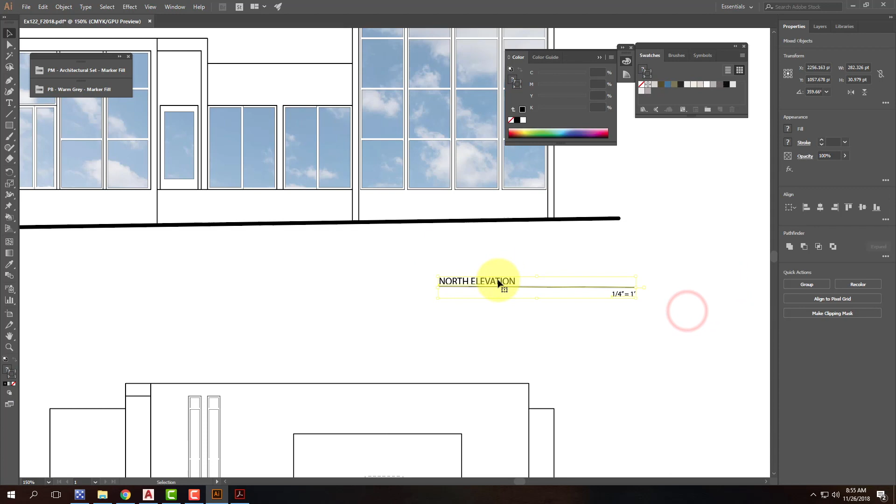And then maybe underneath it, I would come in and I'd put another little text box. And this time I'd say this is going to be 1/4 inch equals 1 foot. Oops. And that really doesn't need to be quite that big. So I'll go back to my properties and I'll say, you know what, this could be about 10 point. And we'll put that down there like that. This is tastefully done. Not too much. If I press Control-0 and I look at the whole thing, that doesn't distract from my drawings. It's just a little bit of information. Okay? This is a good strategy for doing it.

It could be as simple as north elevation. It could have the line. It could have the scale. You could come up with some combination. You could say, instead of having it like that, you could put the scale over here a bit and shorten this down so that it looked like that. Maybe it comes up here a little bit higher. Something like that would work just fine too.

The font that I really like is called Frank the Architect. It's by a guy named, I think, Harold, who did a variant of the Tekton bold and created this Frank the Architect. He named it after all the architects named Frank because there's a lot of them. And it's one that I've found is pretty nice. It works pretty nice. It looks like an architect font. It's not overly done. You could create your own font if you had really good lettering. This one, there's a free version that you can download without having to pay for. There's also a paid version that gives you more options and more symbols and that sort of thing.

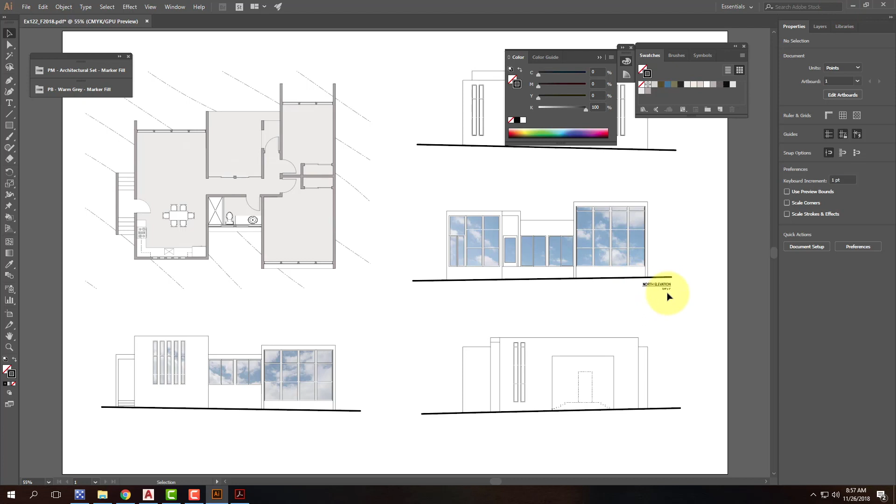You can, of course, also just use one of the basic fonts in the operating system and work with that as well. The Frank the Architect font is what I've specified on some of these title blocks when they come in. So be aware that it's going to substitute fonts if you don't have that font installed on your particular system. So if I wanted to bring in any of those, I'm going to work on yet another layer. I'll call that layer title block.

And title blocks are interesting. If you are doing kind of a working drawing set or an official set of plans, you would have a title block and you'd have information about who you are and who the client is and that sort of thing. If you were doing a presentation that was going to go up on a wall, you may or may not have a title block. Frequently, presentation drawings don't have any title blocks at all because you don't want to constrain what you're doing. You go full bleed and you have big images and that sort of thing.

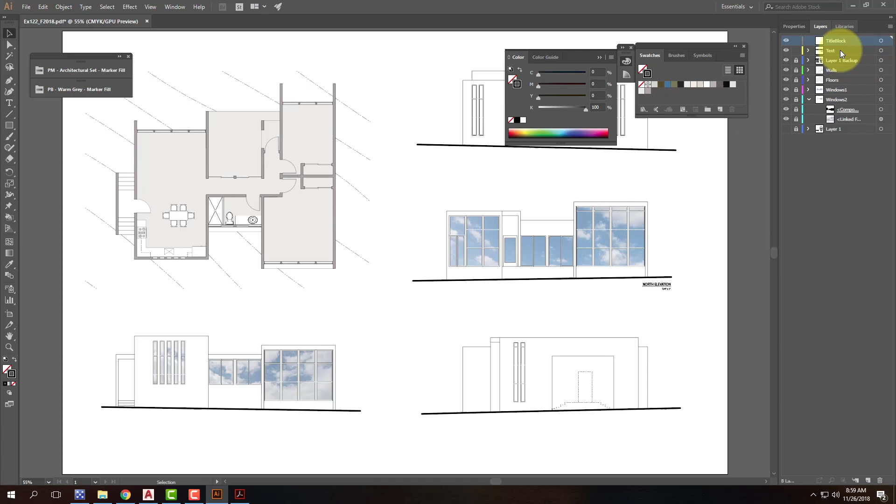So it's not necessary to put the title block in, but I want to show you the process just in case. In this case, I've already made the title block. So when I'm on the title block layer, I can go to File and then Place. And this is in my resources. I have something called, I think it's in Illustrator, title blocks. There we go. And here is a 24 by 36 title block. I'll go ahead and click on Place.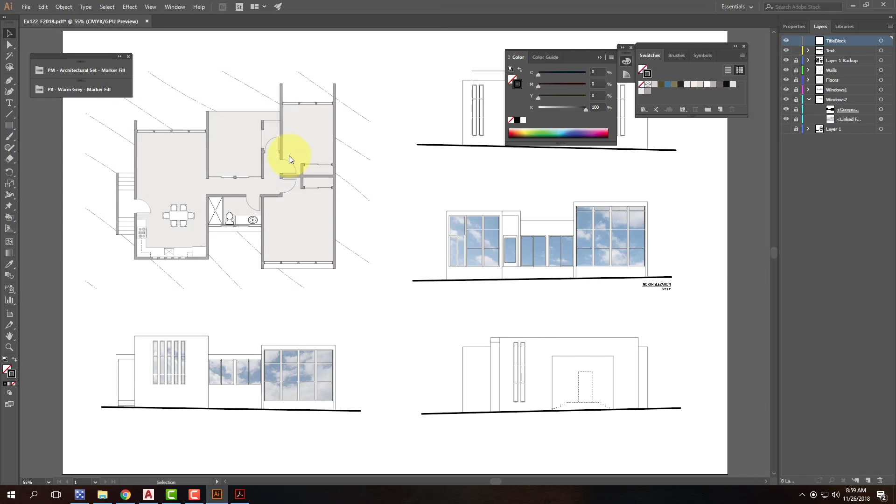And I'm going to pick the upper corner. And there it is. It drops in, which is fine. Once it's in here, though, we're not seeing through to my drawing. So while it's still selected, I'm going to go to the Properties, and I'm going to go to this Effects button. And it's not there. Oh, nice.

Sorry, bear with me for a second. I love it when things that I say are going to be there suddenly aren't there anymore. I should be able to change the blending mode. That's what I'm trying to do. And for some reason, it's not letting me do it.

There we go. Let me open up Transparency. I'm going to Window and then Transparency right there. With the Transparency window open, I'm just going to change the blending mode right here from Normal to Multiply. We've done that before in Photoshop. And when I do that, it's going to look right through that white background. So it's the same thing in Photoshop so that I can see my title block.

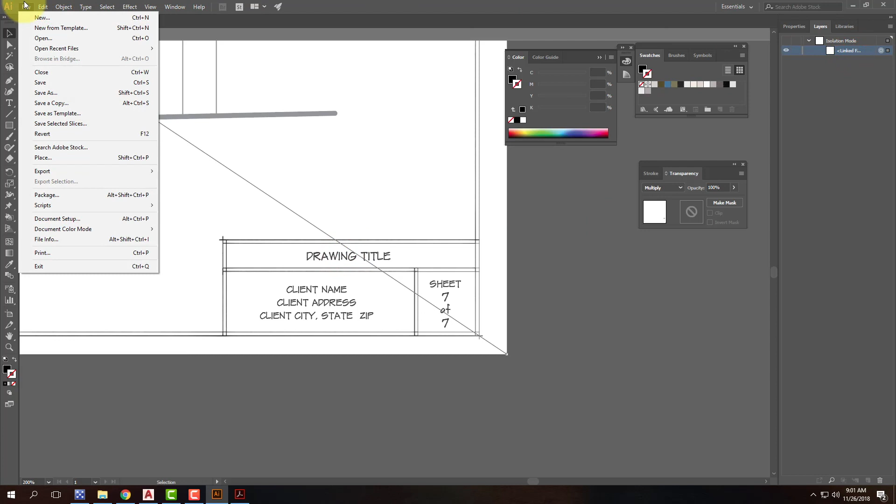All right, so because it's still a linked file, I might have to embed the linked file to be able to edit it. So bear with me for just a second.

All right, give me 1 second. I'm going to bring that in one more time and see if I just missed an option here. I'll go to File, Place. Let me click on the Show Import Options and see if it gives me an option here. So I've checked the Show Import Options. Let me go ahead and Place. Yeah, crop to media, all that's fine.

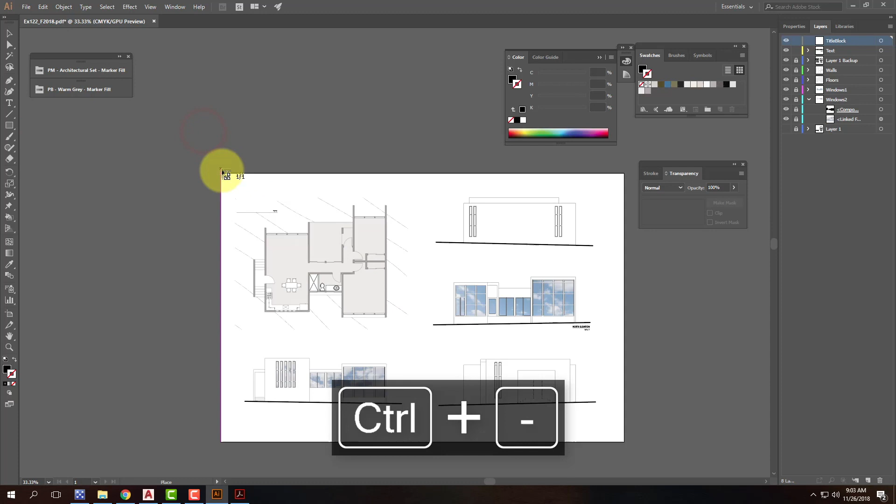Huh. I wonder if it's under the Links menu. That might be where it is. Like I said, I apologize for this. And go back into multiply, and then let me open up my links menu.

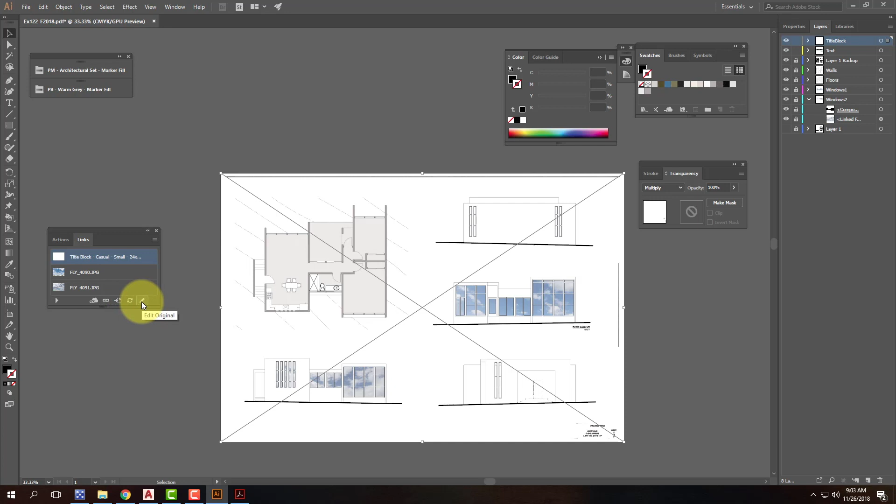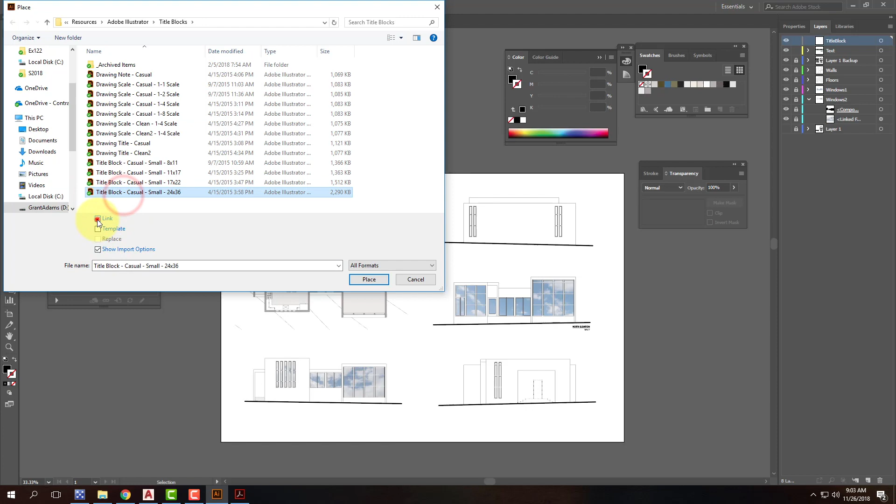All right, it really wants me to edit the original for some reason. So I could do that, but I'm frustrated because I should be able to do it right here in the live version. Let me try one more time. And I'm going to uncheck link here and see if it'll drop the whole thing in for me.

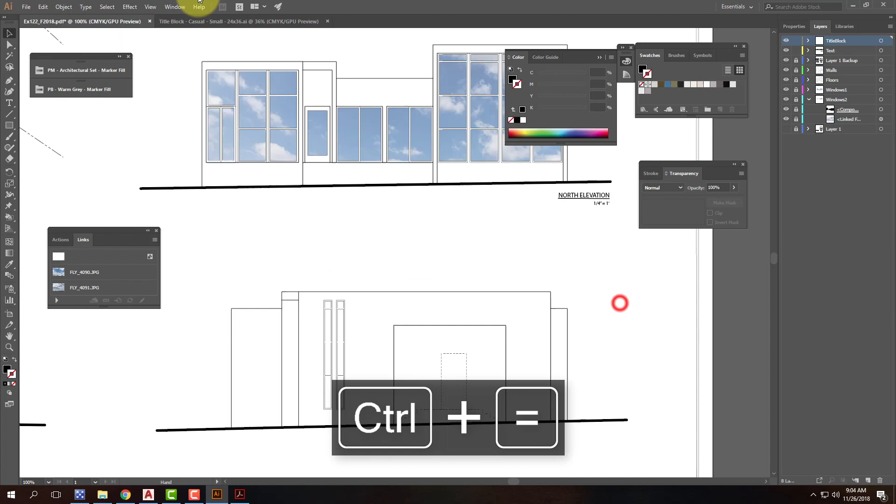OK. So in this case, it's going to. So I don't have Frank the Architect installed, so I'm just going to go ahead and close that. We will switch this into a multiply blending mode. But by unchecking that link option, it's embedding the drawing straight in, which is going to allow me to edit the text. I don't know why it was not letting me do that after the fact.

So now that that's been the case, I can come in here. I can double click on the text. There it is. And I could give this a new title. So this would be Yosemite Cabin, for example. And under client name, you get the idea. I could go through and change these as well.

The pink is telling me that the font is being substituted. So you may find that you want to take all of these and under properties, change the font. Window, character, where'd it go? There we go. And so I could change this. If I had Frank the Architect installed, that would be fine. But I could also change it to whatever other font that I wanted, like that, and then go through and make your adjustments. So this would be sheet 1 of 1.

A few other things like these got off center, so you might need to do some adjustments in the centering. Let's use that. I'm going to go into Window and then Align. So we can center all of those objects. Same thing here. I click one more time on that first one to make it the key object, and then adjust. And then I would fill this other stuff out. So we could say this was, or whatever. You get the idea. Okay? So that would be inserting a title block.

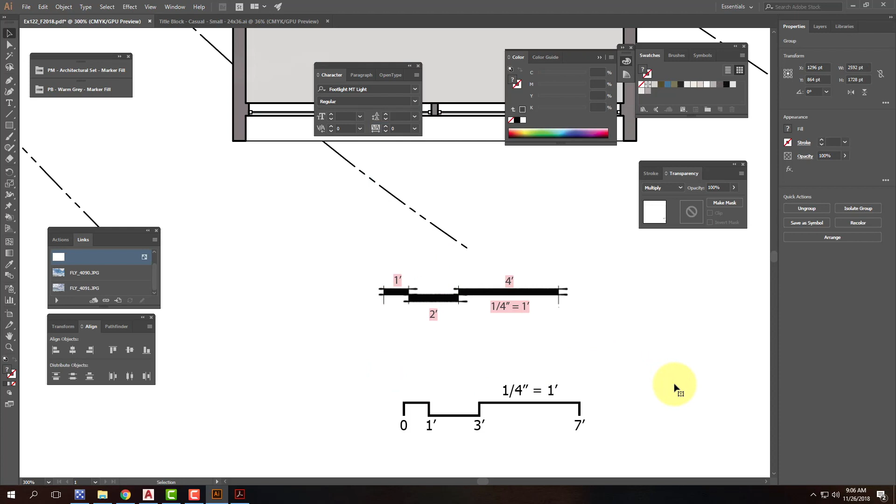I have another one. If I went to File and then Place, this is my clean 1/4 scale. A little bit more modern in its look. Just a different strategy, different style as it goes through. I can go to File and then Place. Drawing note here. If I were to drop that in, it's just the note with this little arrow that points to it. You could drop that in and add a little note.

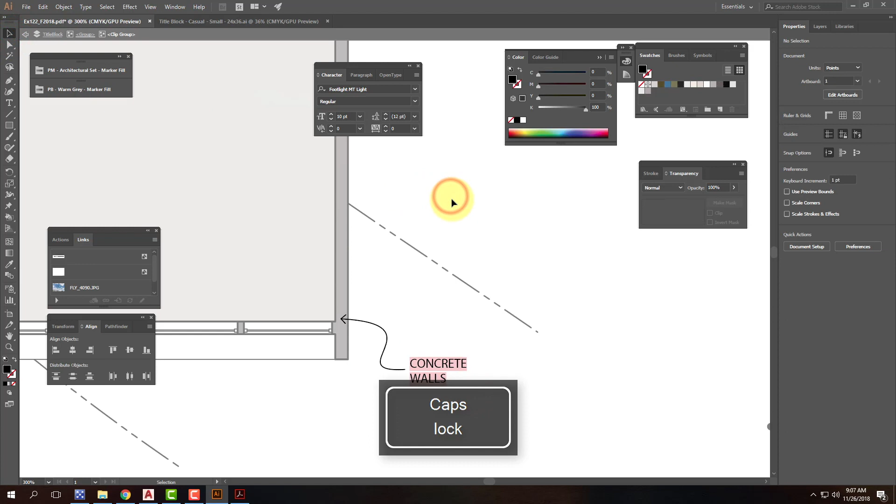So in this case, I could say that those are concrete walls. For example, I'm just making stuff up. So if you wanted to put a little note in there, you can do that as well. Let's see, what else? I went back into File and then Place. Wait, I have to get out of isolation mode.

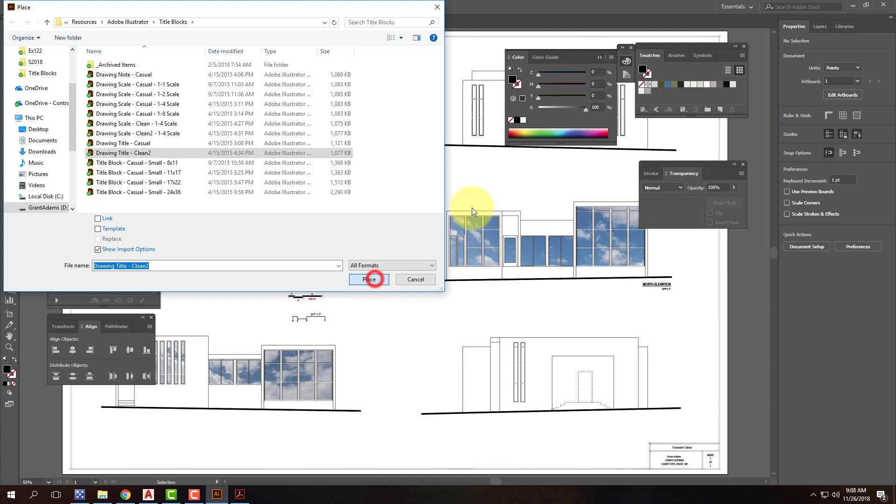The last one was the drawing title. So again, two different options here. This one looks like the thickness of the line is off a little bit. But this is a combination of the drawing title and, come on, a graphic bar scale. What? There it is. Where you have the title and then you have the little graphic bar scale at the end. Just another option that's out there.

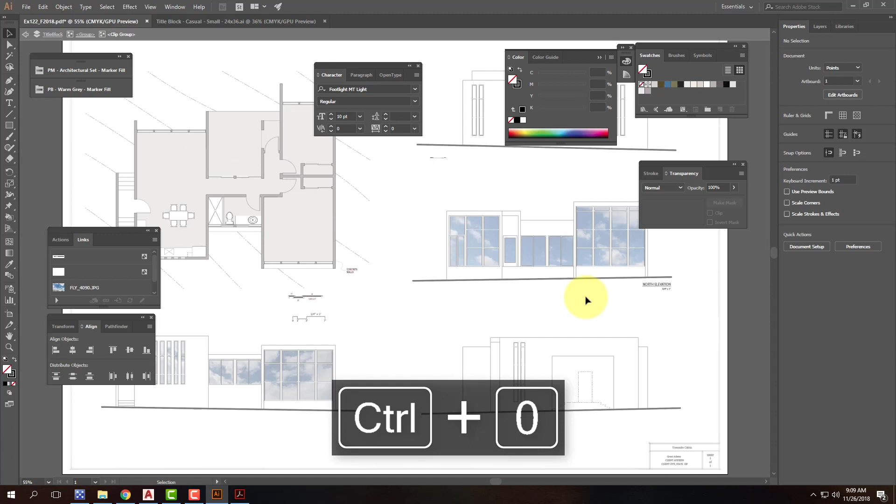So I'm just showing you those things because those are pre-made objects that I created for you to help you kind of get things set and to look right. For whatever reason, that title seems really small. I think it needs to get a little bit bigger. So the purpose today is to take your AutoCAD file, bring it into Illustrator, do some collage work. The goal for your assignment is to have it look good. The goal for today's exercise is to practice, if that makes sense. So it doesn't have to look good at the end of the exercise today. However, it should look good before your assignment.

One last piece when it comes to the assignment, and that is that you actually have to do a print for me so that you can prove that you know how to go to the plotters. I'm going to attempt to do it from here to show you what the options are. I don't know for sure that it'll work. Frequently, the best strategy is to go, the plotter's in the other lab. There's a USB cable from the plotter that you can plug directly into one of the machines.

It will reach one of the machines in the other lab and print directly from that machine. That seems to work the best. I don't know whether I can do it remotely here, but at least I should be able to show you the options if it doesn't crash on me.

So when it comes to print, I would encourage you to save your work first in Illustrator. It will still save as a PDF file, which is fine. Then once it's done saving, go ahead and open it in Acrobat. So something like this. I'm going to use last year's version to print. Open it in Acrobat, go to File, and then Print.

And under Printer, you're going to choose the GoPrint DJT520C. That's the plotter over in the other room, I think. It might also be this T520C. I don't know. We'll have to go check. Then once you've selected the printer, go to the Properties button here.

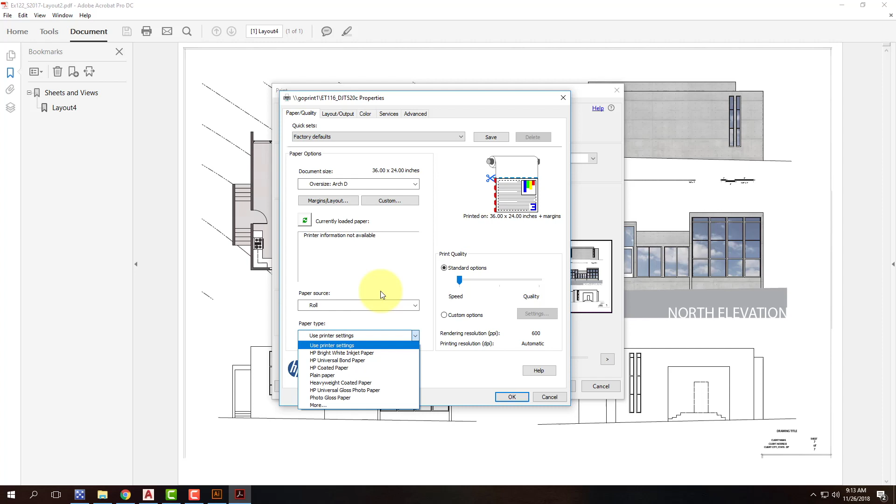Yes? Also, you should change paper to roll. Thank you, if I didn't already do it. Okay, so when it's on Use Printer Settings, chances are it's already on roll because the roll's loaded. But yes, you can absolutely override it and make sure it's on a roll. That's what you're printing from. And under paper type, just use the printer settings. We could specify a particular paper type, but it doesn't matter. It's going to be whatever the printer says.

And so once I'm done here, I'm not going to click Print. I don't need to actually print it, but that will allow it to print. Like I said, I think you'll have more success if you use one of the computers over in the other lab where you can actually take the physical USB and plug it in. You can try it through GoPrint, but the GoPrint system is pretty iffy, which I'm sure by this point in the semester you're already well aware of. So plug it in directly, and you'll have a little bit better luck.

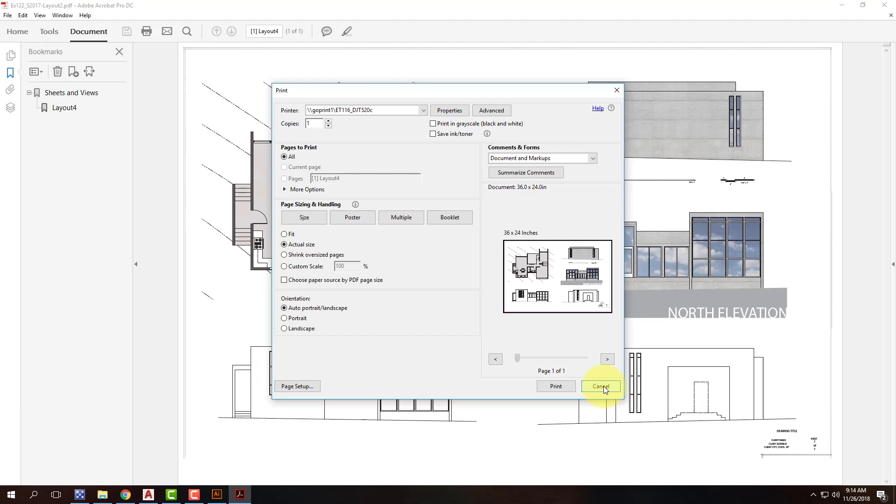Okay? So for your purposes today, go ahead and work on doing some of the collage work. Remember, do what looks best when it comes to printing. You don't have to collage everything. This is just a little bit more enhancement toward your final product. Are there any other questions? No? All right. I'll let you guys start working, and we will pick up next class with SketchUp.